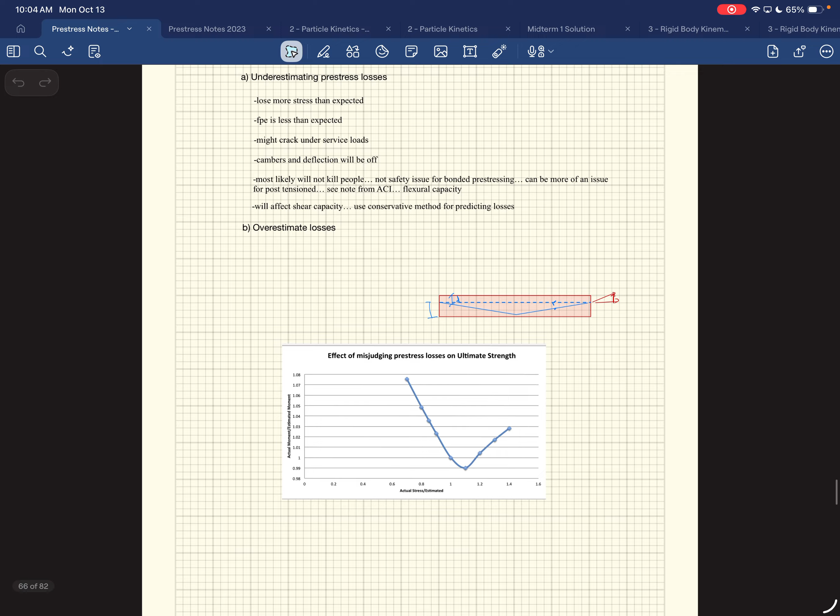All right, so we got... I gotta get organized here. Popped up on the TV right when you were tackling. I was like, that's...

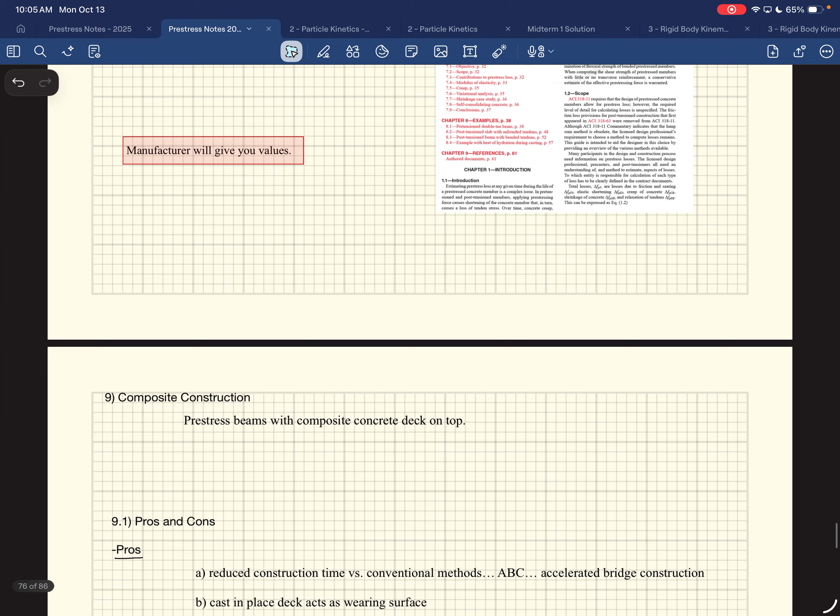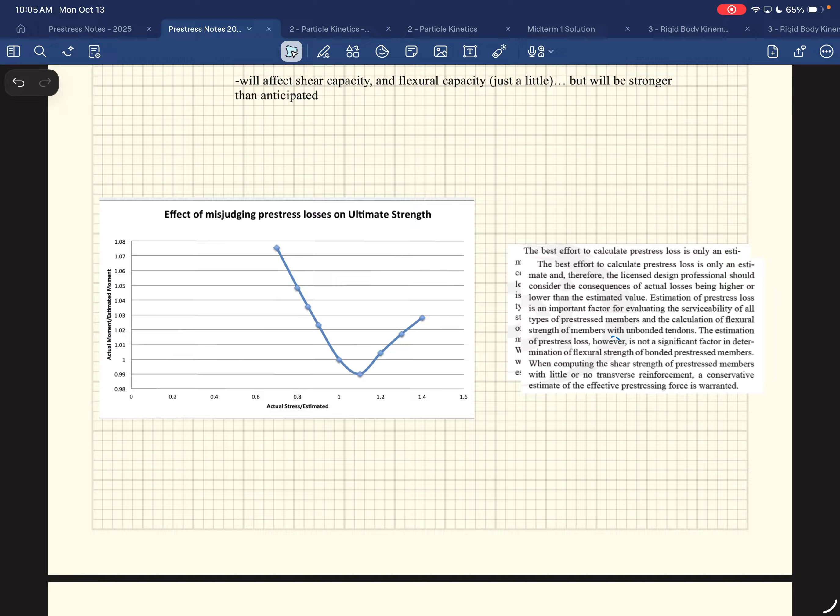Not to sit in there looking pretty. He does look pretty when he's sitting there, though. He does, but he shaved his beard off, or his mustache. Yeah, what's up with that? Change it up, keep you guessing. Yeah, gotta keep you guessing.

All right, so we're talking about Apprio. First of all, it went okay, I heard from some of you that it went good with Adam. I think that we've learned that maybe they're not... you just spilled coffee on yourself. No?

I heard that they might not be a PCI producer member, but I think we're gonna apply this week, hopefully, and just make sure that they can actually do it, even though they're not a PCI member or whatever, so that we could really take off on your exams. Did he talk about a time frame or anything like that? Like when we need to get him designs and when are we looking? The long story short is, basically, if we're doing mix design, if we do our own mix designs by about...

Monday, next Wednesday maybe. Okay, and then they're gonna cast those cylinders, and then like 28 days later have the beam designs. Okay. Before... yeah, I mean, do you guys want to do your own mix designs or just use their mix designs? The rules are a little weird because it says you have to have like 1 to 2 pages explaining your mix design. Does that mean we can use theirs?

Absolutely, and then we'll just explain what they did. That may be the easiest thing, is just use what they're used to using and then crank it out, because we don't know what our slumps would be. If you guys remember in Structures 2, what a pain that was — you estimate what the slump is, but what you actually get is different, and then what all the strengths are and stuff.

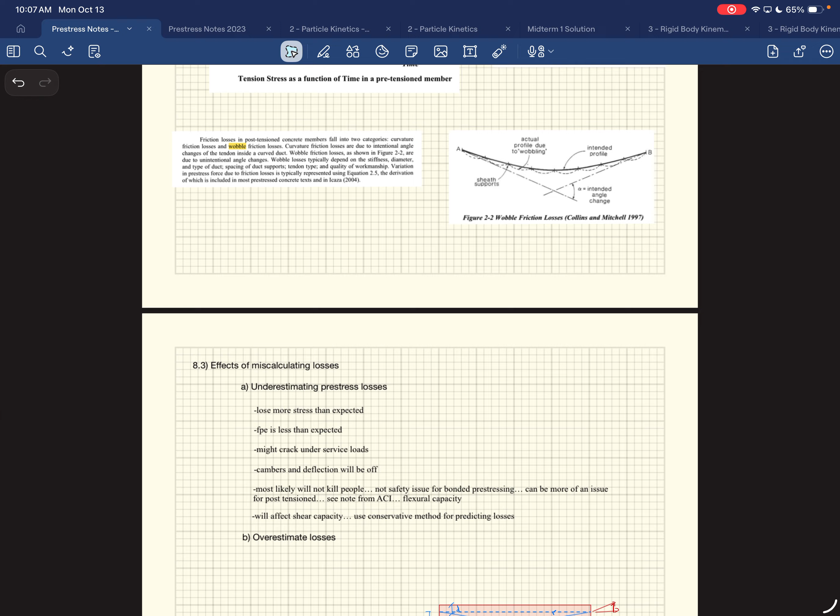I do want to show this — I stay at this lookout, and I'm actually gonna stay at it tonight too. This is the Garnet Mountain Lookout. It's open tomorrow night if anybody wants to use it. I know you guys have class at 8 in the morning, but I'm sure if you told Tim... I'm going up to it tonight with a couple friends. I'm sure if you told Tim what you were doing, he would say he'd record lecture, but he actually wouldn't record lecture.

But look at some of these shots that we got, it's really cool. I rent it every fall, and we go there. Also, this deal...

Oh, Jesus, damn right, I was watching it. Whoa, that's a hell of a deal right there. So what's that again? The sound. Look at that, Neil, huh? Look at it, he's all pumped up.

How was your elbow? Good. A little replay of it, dude. Boom, that's a fucking form tackle, man. That's a good hit, isn't it? Yeah, that's the kind of tackle that makes me angry, that's a really good hit. We'll just watch that over and over.

Film — how did film go? Film was good, right? Right? Oh, you haven't had it yet. Yeah, right, they're gonna be talking about that one. He's pumped. Boom, dude, fuck, you see his head shake and shit, dude? That's a good deal, good job.

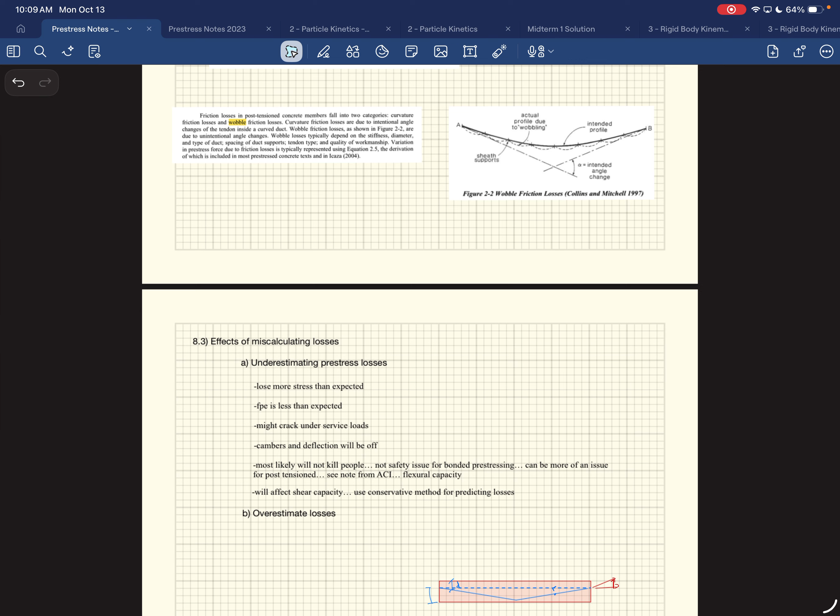Sitting there, looking pretty. I think they meant to call it on 18, but they called it on 19, because when you did that tackle, they're like, 'Oh good, welcome back, Neil.' Did you see this clip before? A little bit here and there. It says 'Welcome back, Neil,' or Daly, and then, 'You know, he did have that holding penalty early on.' Not even the same skin color. You got blamed for it, Neil.

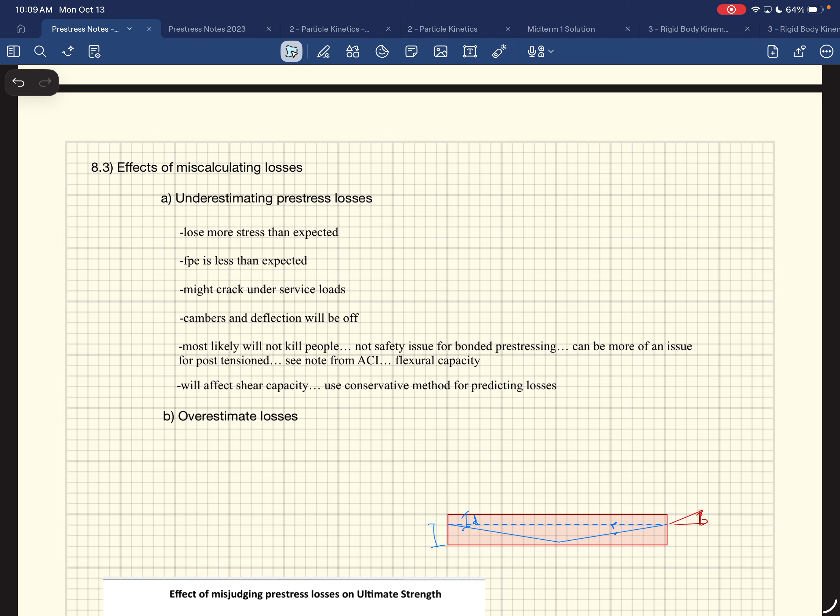Okay, so then what's coming up? We have one topic left, right? We have one topic left, and the topic is... so, is anybody interested in the lookout?

But because it snowed up there, I think Bryce used it on Saturday night, and he went up there in the rain, and then it snowed like 6 inches overnight, and he came back down. But you gotta take some time off, Neil, go up there, practice off. Think about it, because it's really cool. It's rented out every night of the year. I booked it 6 months ago, right on the 6 months to the date, right at the time it opened, and got it for like 5 nights or something like that.

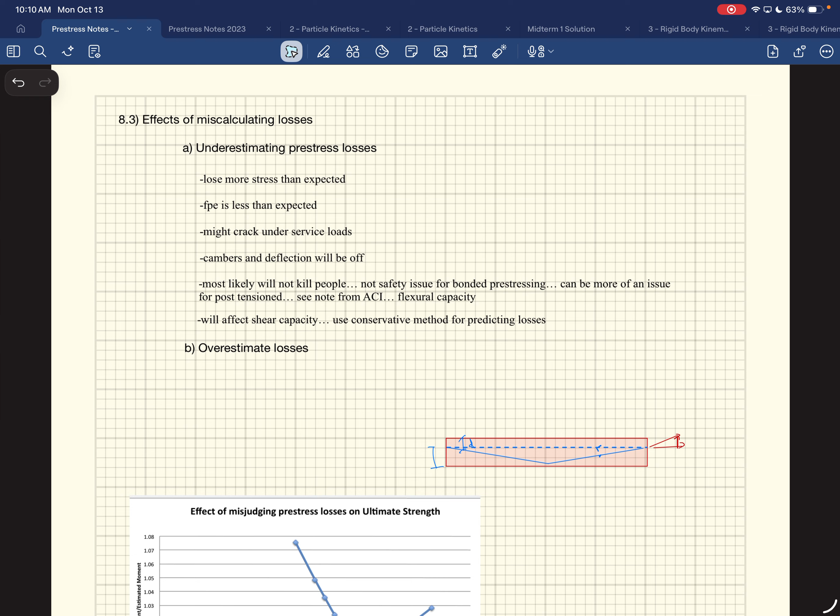So that's all, you're thinking about it. Thinking about it, but also Tim's not going to record the lecture. No, but I'm sure he wouldn't count it against you, but then you'd be up, and he loves catching people. He went through 3 names this morning trying to get someone, he just kept going, didn't get anybody. It didn't work, even though only half the class was there, he picked 3 names that were all there. He's mad, he's probably mad that happened. Right? I bet he'd understand.

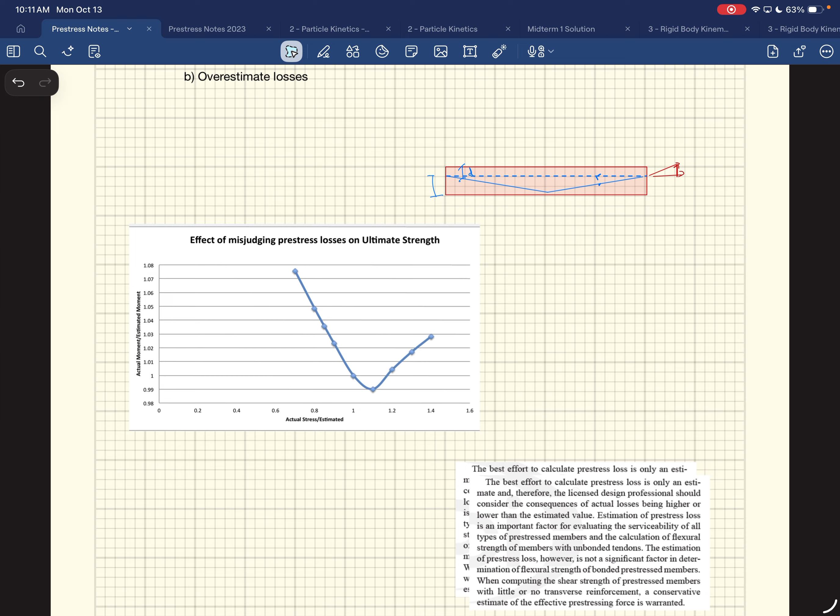It's cool, and then so you have to hike in. It's about 4 miles in with 3,000 feet of vertical. It's the lookout that's like if you're driving up to Big Sky, right by Storm Castle, right across from Storm Castle. You look up there and there's a little lookout tower sitting right there. Think about it, it's hard to get in there.

Okay, so we're talking about pre-stress losses. We have pre-stress losses that we're going to finish up today, and it's a pretty prescriptive method for calculating pre-stress losses. Then we're going to do composite construction, which actually works out really well for those of you in eGen 415. Who's in eGen 415? Because it's going to be a method of composite sections, or a method of transformed sections.

Kristen said she convinced you to teach it this way. That's bullshit. No, that's bullshit, did she say that? I've been teaching it this way forever, and she used to teach it a different way. I told her she should keep teaching it that other way because it makes me look like a better teacher, since she teaches it a very convoluted way versus the way that we do it. It's gonna be straightforward, and that's it. So we're gonna cover that, and that's it for pre-stressed, precast type concrete stuff, for the notes.

So we should be done with that the rest of this week. Next week, Monday, Kyle is going to start talking—not this Kyle, a different Kyle. He's going to do it remotely and lecture to us on post-tension floor design. He gets the floor for 2 weeks, so for 6 lectures he's going to talk to you about post-tension floor design.

We'll probably have one more homework associated with that. We have one more homework that I'm going to assign today, and then one on post-tension floor design, and then we're going to do an exam. That'll be sometime around Halloween-ish, and it'll be on pre-stressed and post-tension floor design.

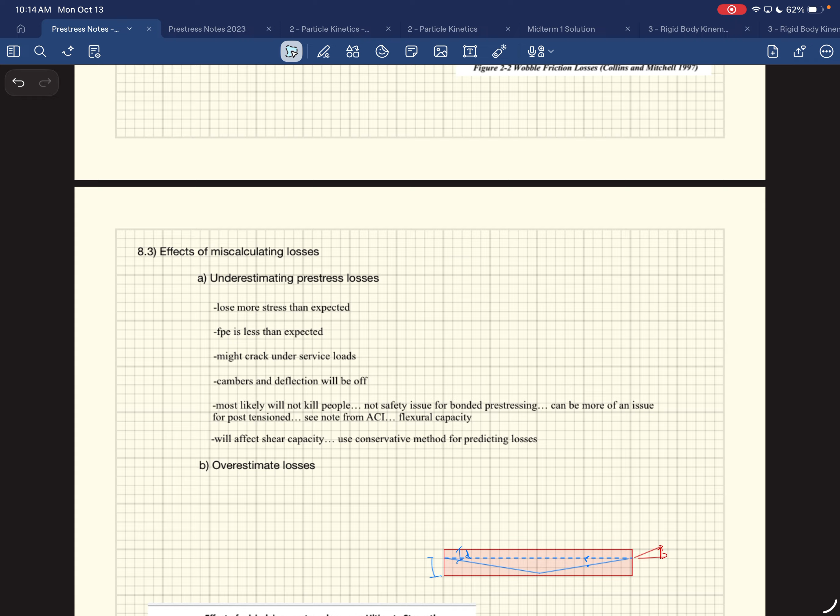I think last week. Don't hurt his elbow, dude. Fire over here. Yeah, I got you. I got you, Neil. Okay.

So that's where we're headed. So, anyways, it's crazy to me that we're this far into the semester.

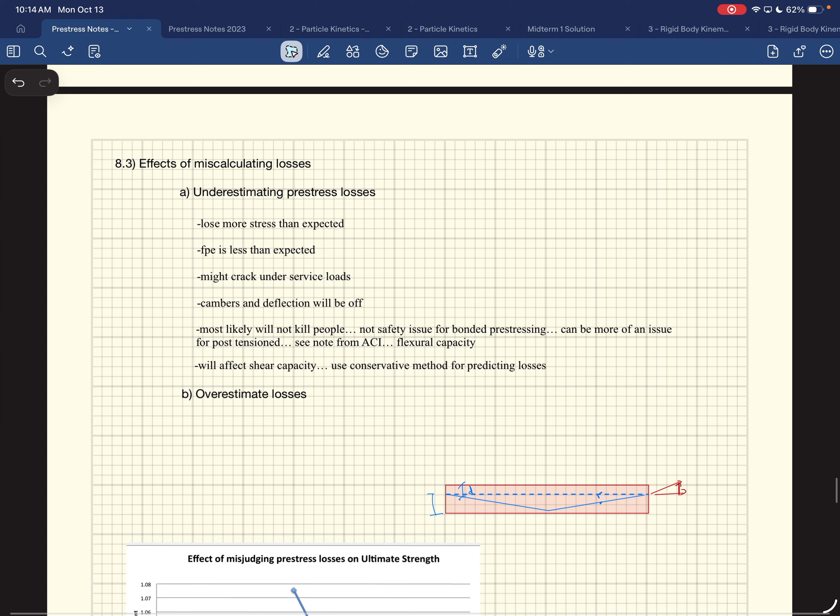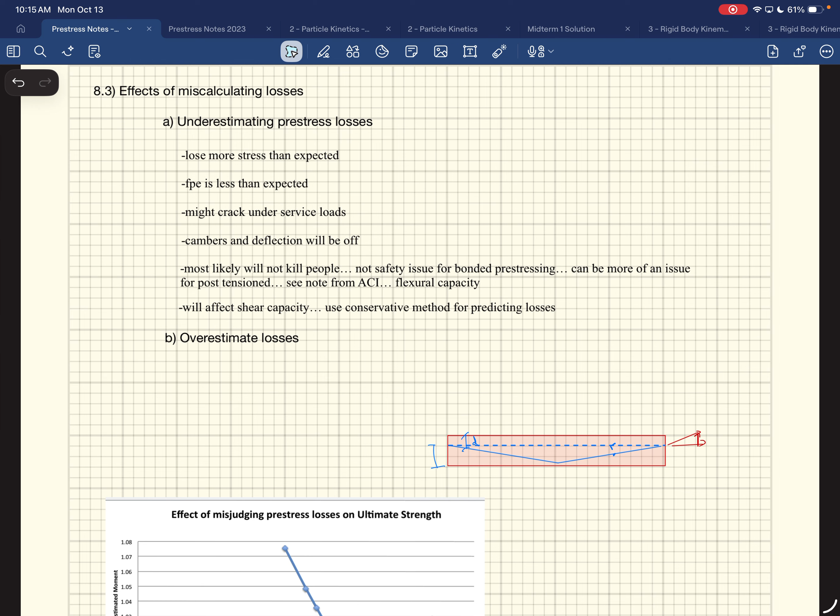So this is just to say, we were just talking about pre-stress losses, right? The biggest issue with pre-stress losses is serviceability. If you underestimate pre-stress losses, you lose more stress than expected. FPE is less than expected. It might crack under service loads, and your cambers will be off. But it most likely will not kill people—it's not really a safety issue. It will affect your shear capacity, because there are pre-stressing terms in your shear calculation, so it will affect that, but it won't affect your flexural capacity too much.

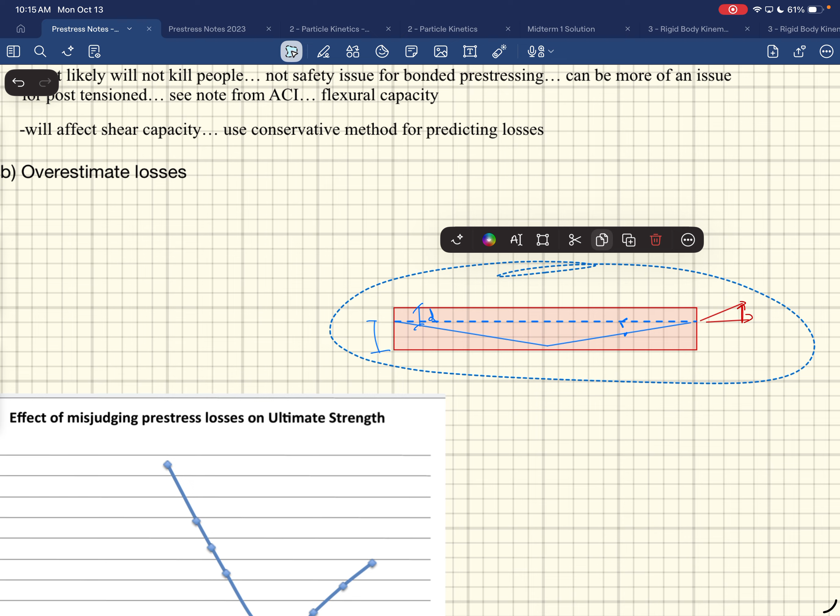If you overestimate the losses, that's what we're going to talk about next—this is for your homework, you don't need that here. So let's talk about what happens if you overestimate losses.

We lose less than expected. FPE is bigger than anticipated. You might think that's not that big of a deal, but if your pre-stressing force is bigger than anticipated, it's going to mess with deflections and cambers. You're not going to get premature cracking with this, but your deflections may be affected significantly. Shear will be affected, but flexural not so much.

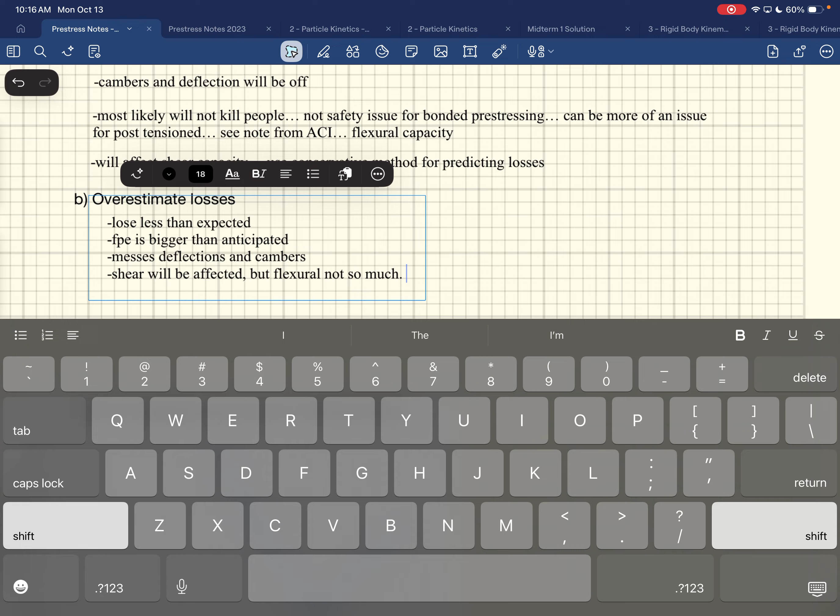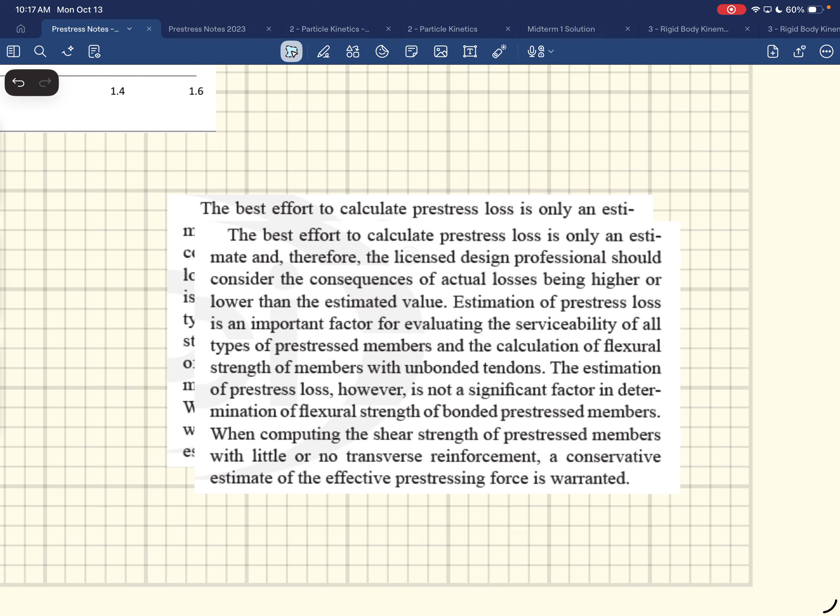I don't know if you have this note or not—I don't think you do. This came straight from ACI. It says the best effort to calculate pre-stress losses is only an estimate, and therefore the licensed design professional should consider the consequences of actual losses being higher or lower than the estimated value. Estimation of pre-stress losses is an important factor for evaluating serviceability of all types of pre-stressed members and calculation of flexural strength of members with unbonded tendons. However, it's not a significant factor in determining flexural strength of bonded pre-stressed members—so bonded pre-stressed members, it's not going to affect it that much. When computing shear strength of pre-stressed members with little or no transverse reinforcement, a conservative estimate of the effective pre-stress force is warranted. So ACI tells you it is important.

This shows what happens if you underestimate losses in one direction or overestimate them in the other. Even if I underestimate my losses by 0.75, my flexural strength is only off by 7%. If I overestimate or underestimate losses by even 40%, my flexural capacity is only affected by 2%. So it doesn't really affect it that much.

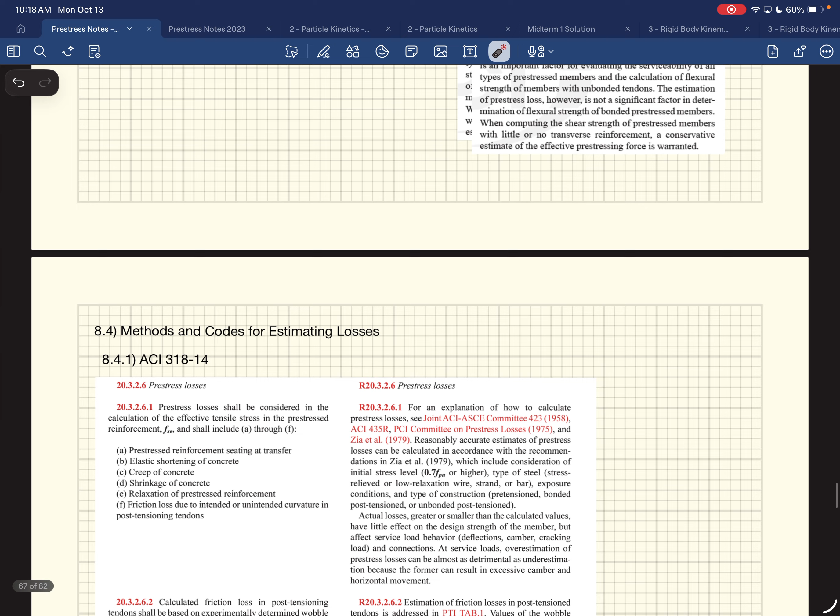So how do we predict these capacities? Let's look at what ACI says. This is ACI 318-14; I checked 19, it hasn't changed. Pre-stress losses shall be considered in the calculation of effective tensile stress in the pre-stress reinforcement FSE, and shall include A through F.

Pre-stress reinforcement seating at transfer losses, elastic shortening, creep of concrete, shrinkage of concrete, relaxation of reinforcement, and friction losses due to intended and unintended curvature. The unintended curvature would be your wobble stresses that we talked about.

That's it, ACI says you should do it. You should come up with a method that accounts for these things, but it doesn't tell you what that method is. It's the same deal: it's important, you need to do it, go do it, and then they give you some references.

We're going to use the method out of PCI, and what PCI uses is this Zia et al., 1979 method for predicting losses. Very current! But it's similar - like I said, they just point you in the direction you need to go.

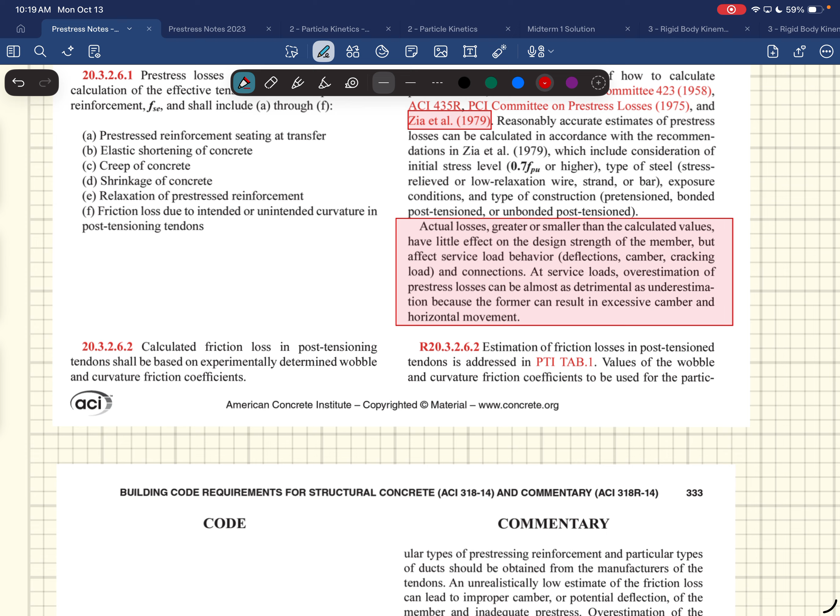There's another comment here: actual losses greater or smaller than the calculated values have little effect on the design strength of the member, but affect the service load behavior, deflection, and camber. At service loads, overestimation of pre-stress losses can be almost as detrimental as underestimating the losses, because you can get excessive camber and horizontal movement. So it tells you to be very careful about it.

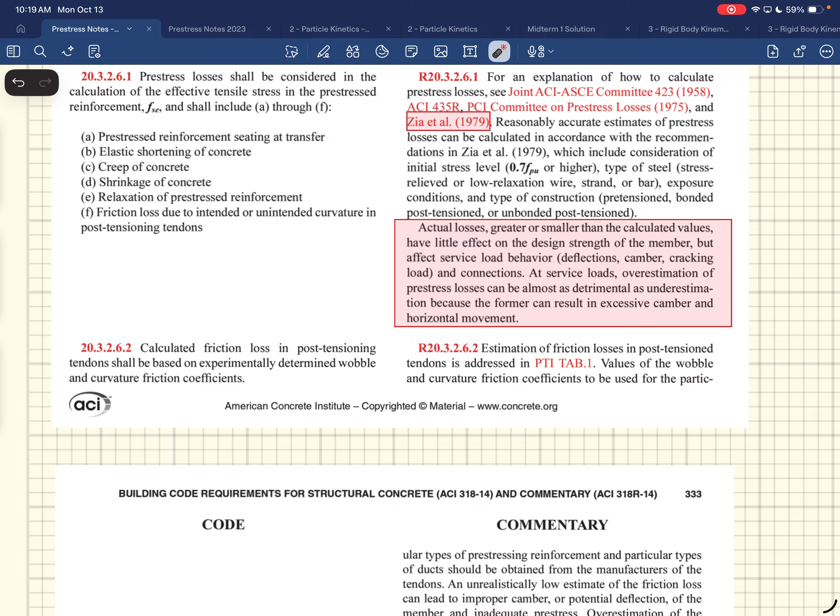But they don't actually give us a reference or a method here - we're going to use this PCI method below. They have a little bit more in the commentary that they talk about.

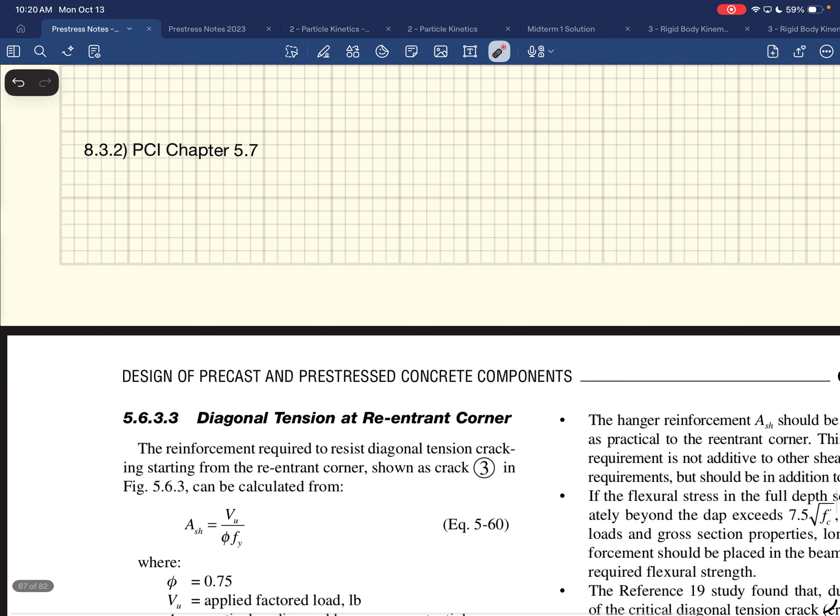So then there's PCI chapter 5.7 in the PCI design manual, on loss of pre-stressing. It talks through a narrative - probably worth reading through this thing. Sources of pre-stress losses: elastic shortening, shrinkage of concrete, creep of concrete, and then how do we actually estimate those pre-stress losses.

Here's the equation - your next homework is going to do this, you're going to estimate pre-stress losses. My total losses is going to be ES, which is elastic shortening, plus CR, which is creep, plus SH, which is shrinkage, and RE, which is relaxation.

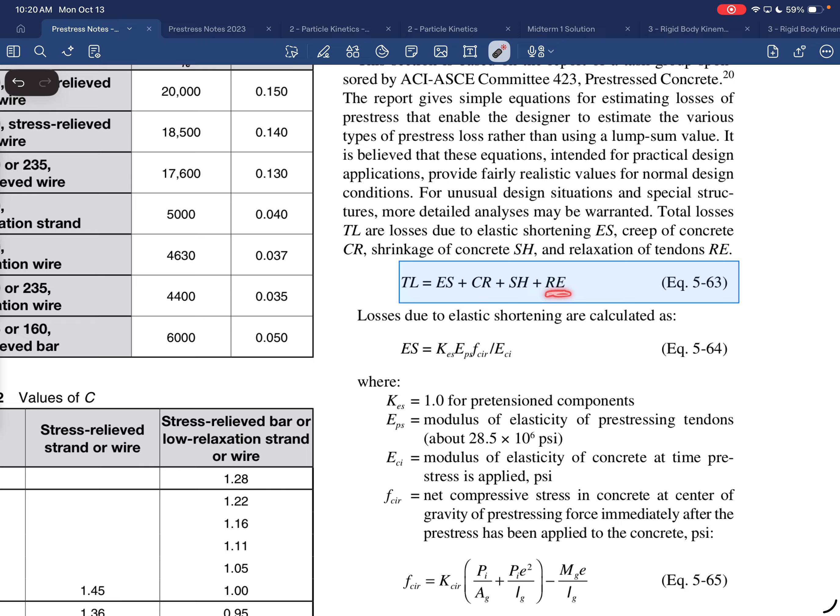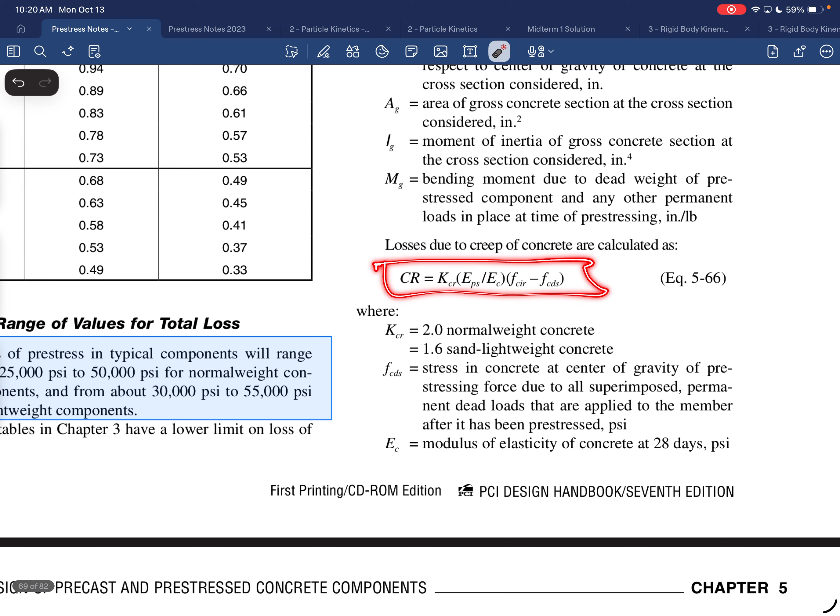It's very prescriptive. You go through and calculate, here's what ES is that we use, and they tell you all the variables. Then we calculate CR, used with this empirical equation, and it tells you all the components going forward. Then they keep going and tell you what RE is, and so forth.

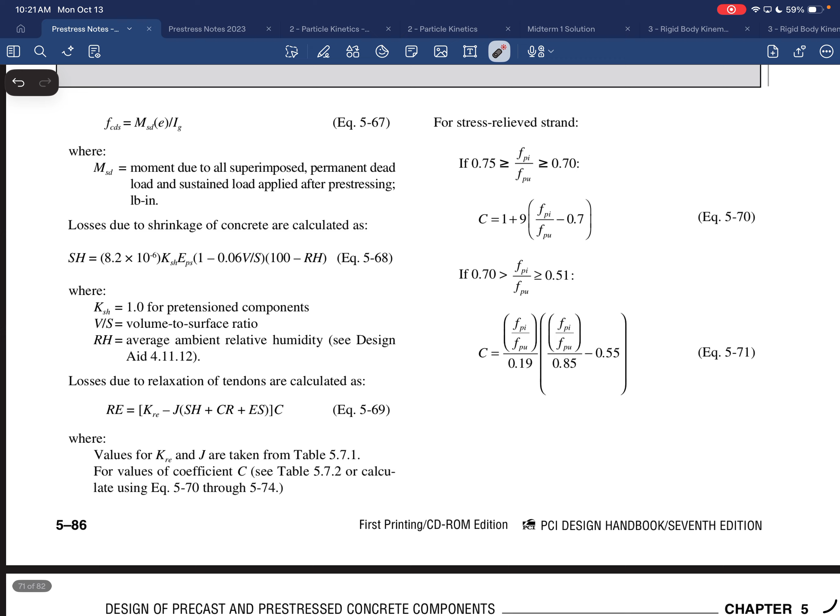So when you do that, you'll just go through and follow it step by step. I think it's all pretty self-explanatory, very prescriptive. And then they also provide an example - here's them applying it to a certain structure, and you can calculate the pre-stress losses.

One thing worth noting, we talked about this at the beginning of the semester: this is the range of pre-stress losses that we're going to get. The range of pre-stress losses is from 25,000 to 50,000 PSI.

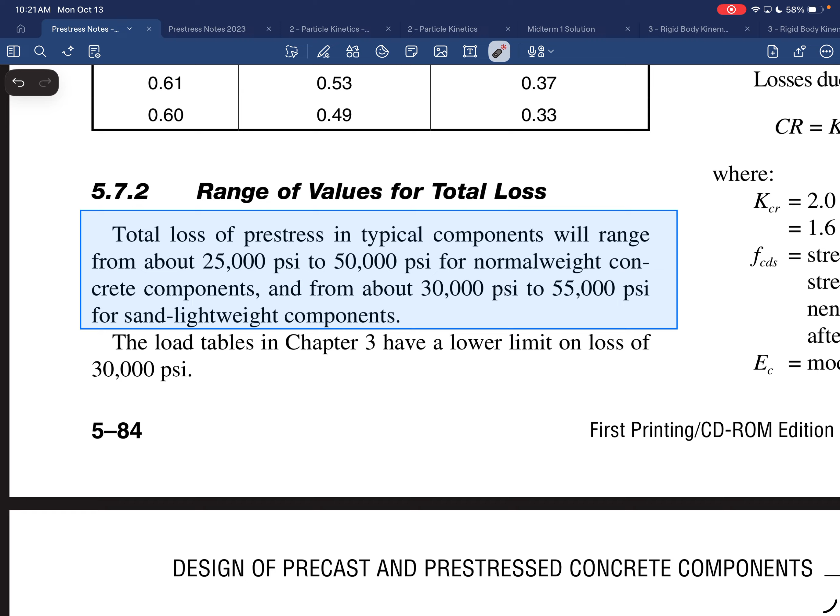So there's a lot of loss that happens, right? That's why we're using 270 KSI steel, so that when we lose 25 to 50 KSI in the pre-stress losses, we still have some effective pre-stressing forces. Otherwise, if you use conventional steel with a yield stress of 50 KSI, you could stress it all the way up to yield and then transfer it over, and then just have nothing left. There'd be nothing left after all the pre-stress losses.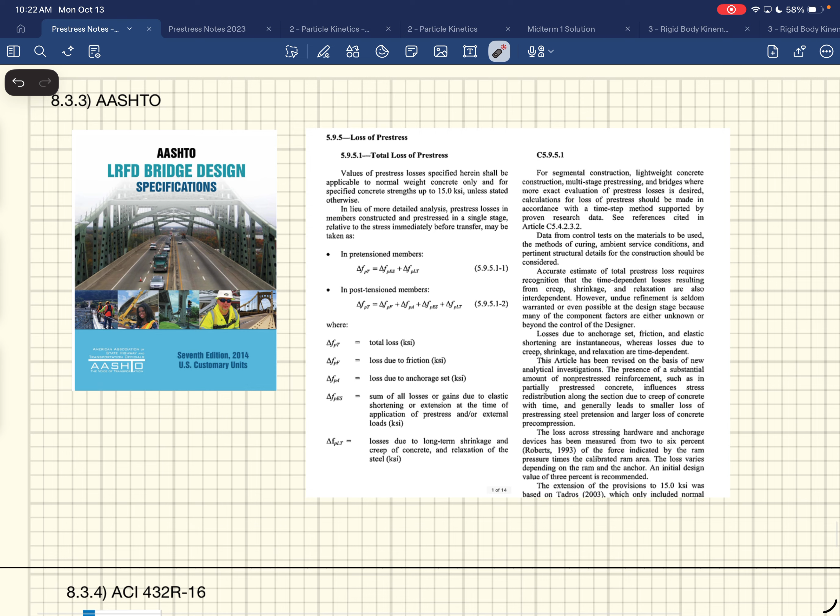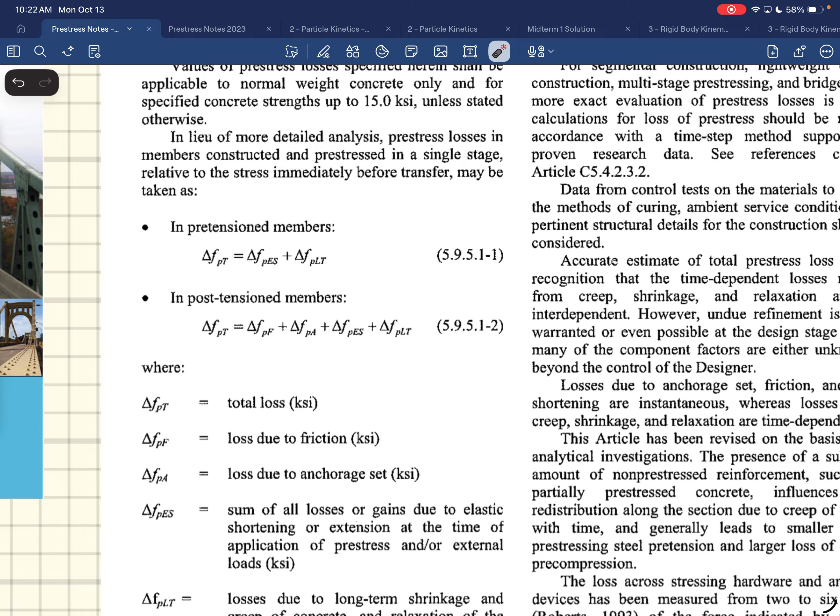Okay, so like I said, you'll do that. The other thing, AASHTO also has a method. We'll look at AASHTO a little bit when we talk about bridges, but they have a method, and theirs is very prescriptive. They do say it's important. It's structured very similar to the PCI, where the total pre-stress losses is elastic shortening plus the long-term pre-stress losses, and they give you an equation for it. It's a very procedural and prescriptive method for calculating pre-stress losses. If you go into bridge design, you'll calculate it this way.

Also, ACI 432R-16. This is committee 432. They have a full committee on estimating pre-stress losses, a full document. So there's a document, ACI 432, and it has methods for predicting those. It basically uses the references in ACI 318. ACI 318 says, here's some references. This does a little more deep diving into those references and then gives you that. So if you end up calculating pre-stress losses, you could use this method as well.

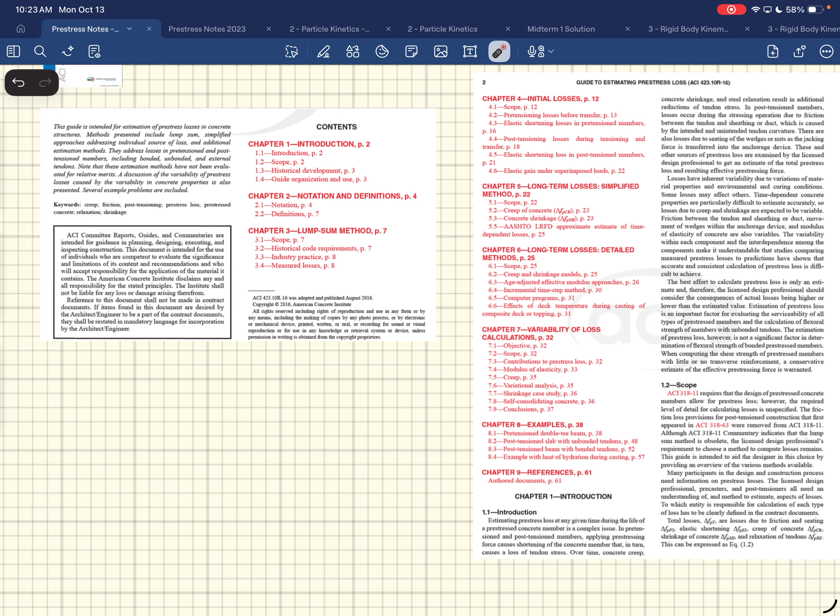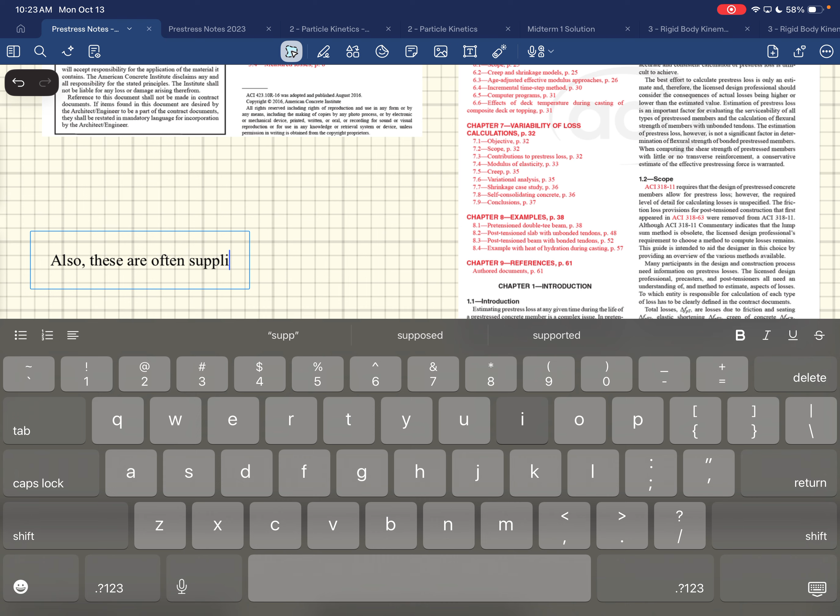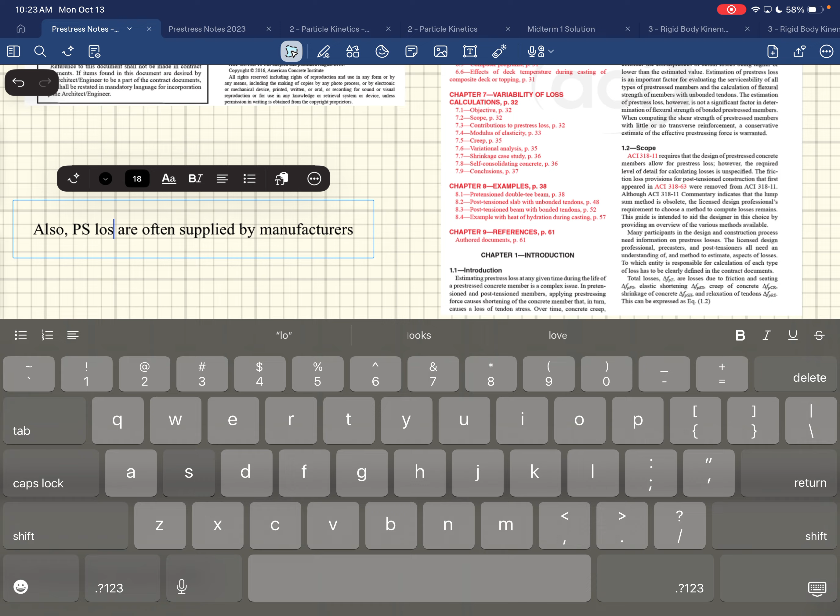The other thing, I don't have it in the notes, but these are often supplied by manufacturers. I guess this is maybe more clear: pre-stress losses are provided by manufacturers. Those plants know how much pre-stress losses they're going to get, and they'll tell you.

Did you guys discuss that at all with Adam? Maybe not, because they should have an estimate on what those pre-stress losses are. I think maybe you guys may need to calculate them as part of your designs, but then also they know. So it might be worth following up with them later and asking what typical pre-stress losses they get, or what equations they use. Because they've been making their members for a long time, and they know what kind of pre-stress losses they get.

When we talk with Kyle next week, he'll explain to us how, when you do post-tension floor design, you as a designer give the fabricator the effective pre-stressing forces that you need for your designs and what it is that you put into your equations. Then on the other end, they go through and estimate how many tendons they need, what they need to stress them to, and what their losses are going to be, so that when they deliver the product and post-tension in place, you're getting the effective pre-stressing forces that we as engineers told them they needed.

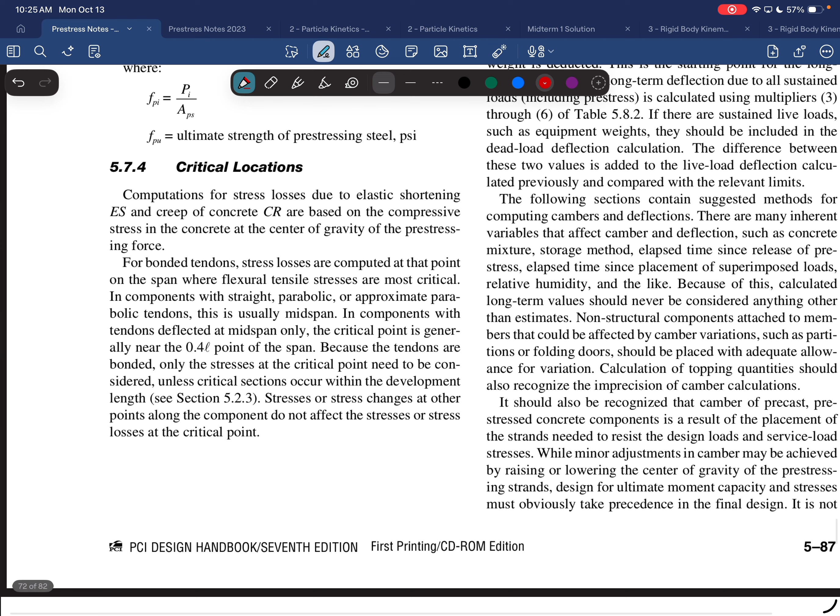So that's how they end up doing post tension. You just say, this is what I need for my design, this is what I use in my calculations, and it's up to them to estimate the losses and the pre-stressing, what stresses they go to, and how many strands they use. They do all that, and he'll explain that more later. But that's just something to know. Not to mention, when you order up one of these pre-stressed beams, they're kind of pre-engineered—the people at the plant actually do the estimations and design them, and then we just check their designs to make sure they're doing it the way they're supposed to for these pre-stressed members.

Did Adam say anything about whether they have an engineer on staff? Yeah, they do. Was he here? Yeah. Did they come here just for us? Did they drive from Missoula just for us, or were they in the region for something? I don't think so, because they also brought one of their architects down. So I wonder if they're here for something else. The architect is out of Spokane.

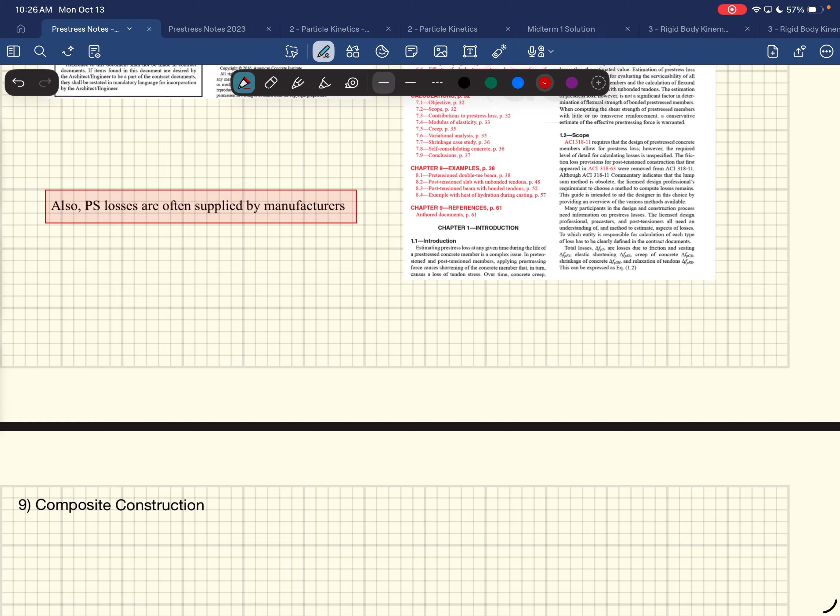They're excited. Neil, did you tell him you're on the football team? No. What the heck, man? I would have told him. I would have told him. Were they Grizz fans? No, they're all Cat fans. Yeah, thank God. All right, Neil would have had to kick their asses. Get out of here.

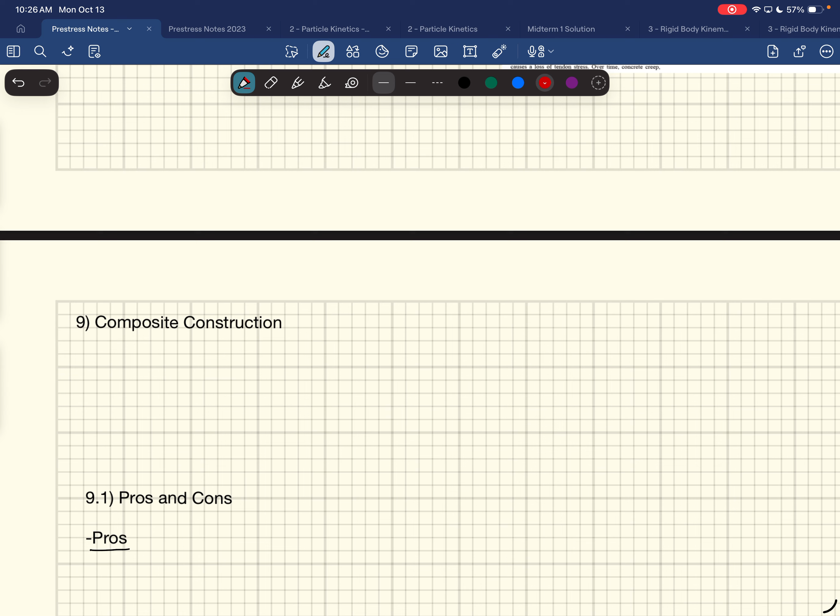Okay, that's it for pre-stress losses. So there's all these different methods, but we're just going to use the PCI method.

For the homework, I'll basically grab one of the sections out of the PCI design manual and say verify that it can carry this load. That means you check to make sure it works for service conditions: tension at the bottom or tension at the top, compression on the bottom under initial conditions, and vice versa under service conditions. Make sure it can carry the ultimate moments, make sure it can carry the ultimate shears, and then estimate the pre-stress losses and estimate cambers.

Then you can compare your estimate of camber versus what's in the table, since they have estimates of camber there. It sounds like you guys have a program that does the elastic analysis, right? Something that proves whether your allowable stresses are above or below the limits, and gives you the ultimate moment capacity. You have a spreadsheet or code that does that, and the same thing for shear capacities.

You can see that it actually doesn't quite work. It's really close in some areas, but according to our calculations, it might fail in a couple of spots. They put some stuff in there saying it might fail in certain spots, so they add extra reinforcement in those areas. That's what you're going to do. It does take a while because you have to deal with those tables and figure out what all the variables are, but it shouldn't be too bad.

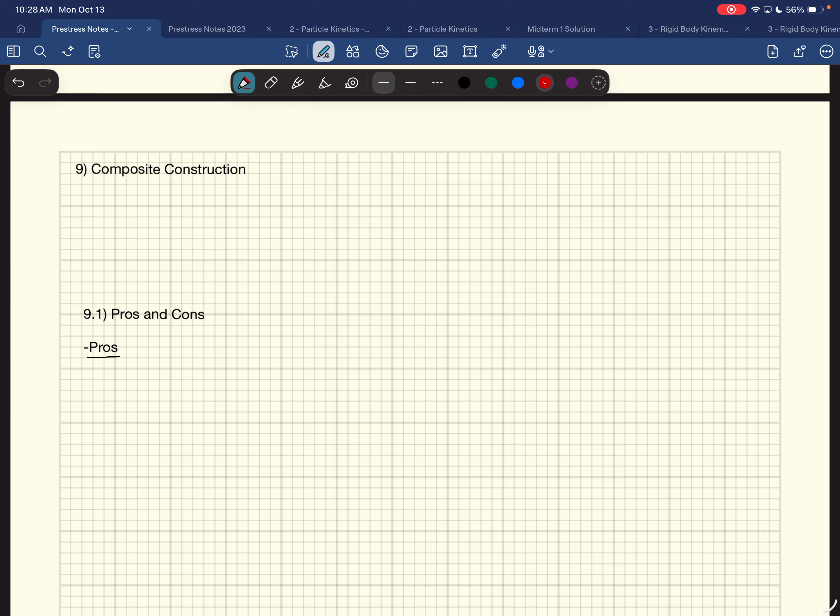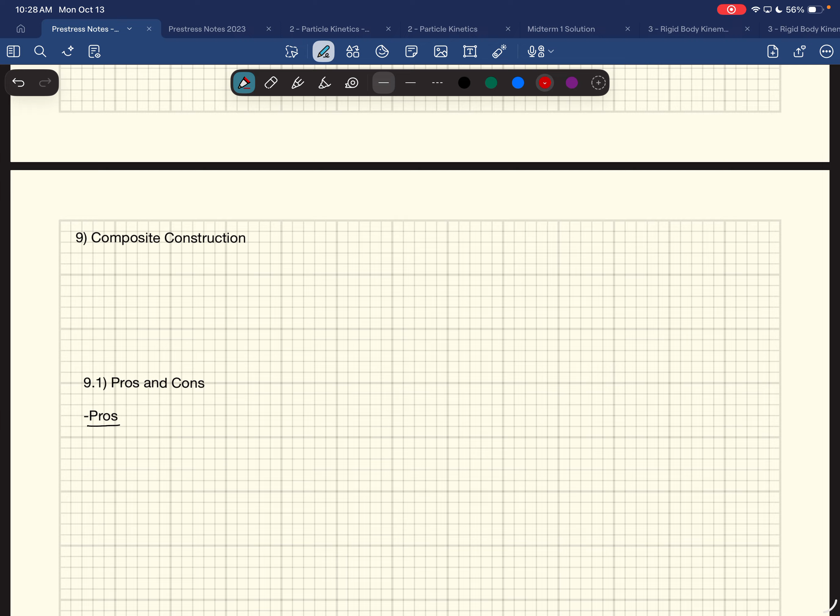Composite construction comes in all sorts of forms. Reinforced concrete in general is composite construction—you've got two different materials combined together, steel and concrete. So just in that sense, that's composite construction. You've also heard of composites like plastics and fibers and stuff like that; those are also considered composites.

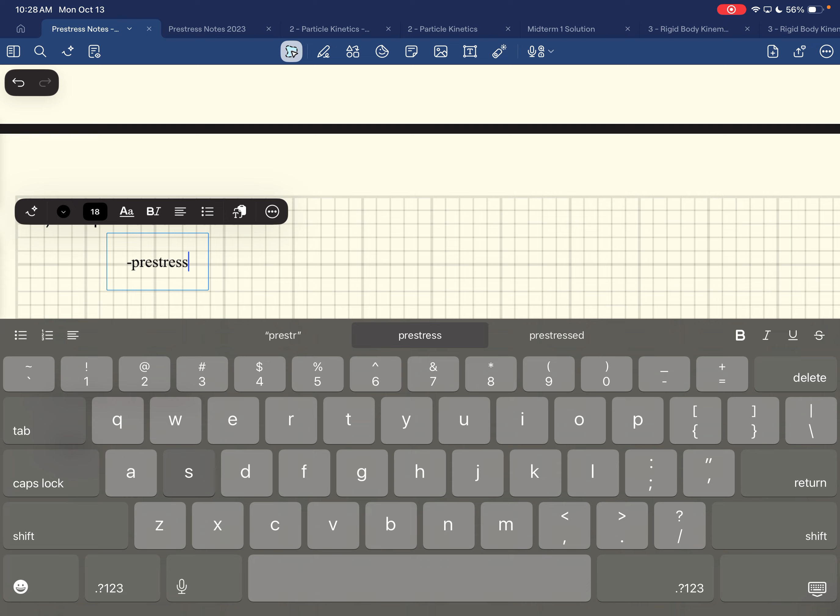In pre-stressed concrete, when they talk about composite construction, we're talking about pre-stressed beams with a composite concrete deck. So you come in, you put down your pre-stressed beams, and then you cast a deck on top of that. That deck will act compositely with the pre-stressed members.

This gets complicated because your pre-stressed beams are made of a higher strength concrete with a higher elastic modulus. So you might have a 10 KSI pre-stressed concrete beam, and then you put a 4 KSI concrete deck on top of it—two different materials. Also, the pre-stressed beam is already pre-stressed, so it's already in a stress state with pre-compression and all this stuff going on, but the deck doesn't have that. The deck is starting from scratch when it starts out.

So there's this: we have the same load stages, initial load stage and then service load stage. But on top of that, we also now have a deck that starts acting compositely afterward. What happens with the pre-stressed beam at the beginning stays the same—the initial pre-stressing and transfer don't include the deck at all. Then you put your beams down and cast the concrete on top, so the beams have to carry the concrete to begin with. Once it hardens, it's ready to be loaded.

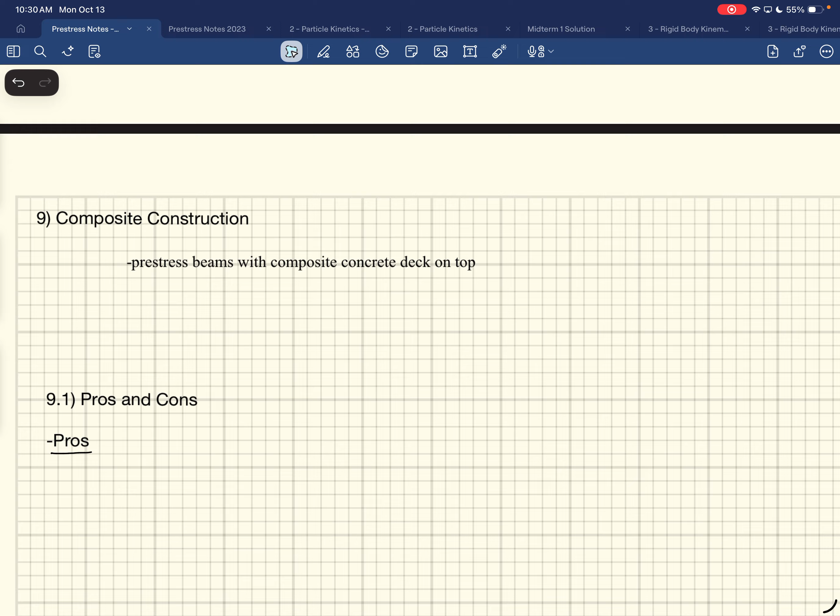And at that point, from there on, it's going to be acting compositely. So then when you apply the service loads on that, now the deck is getting included in the flexural response. And so then we have to, you'll see, we're going to get down to these...

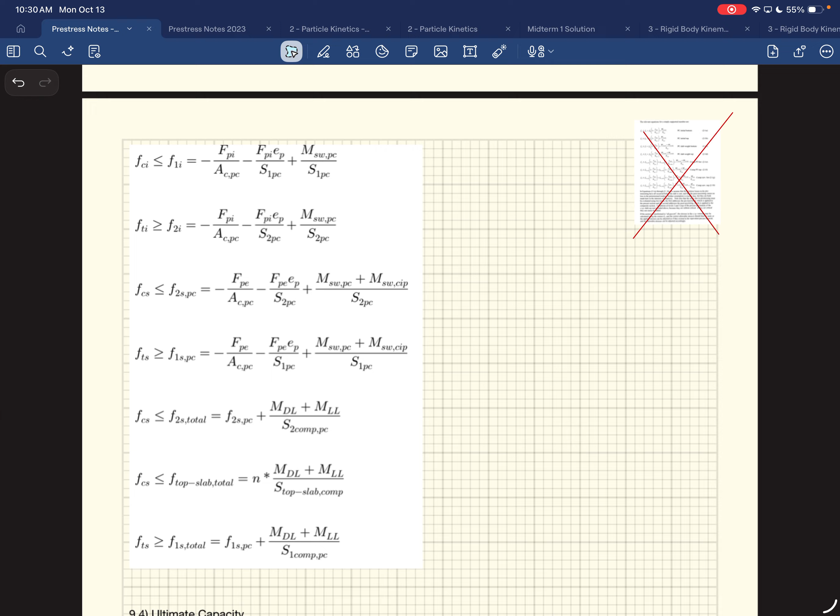Guys, right? Where sometimes you're going to be using the pre-stressed beam alone. Sometimes you're going to have the composite members, right?

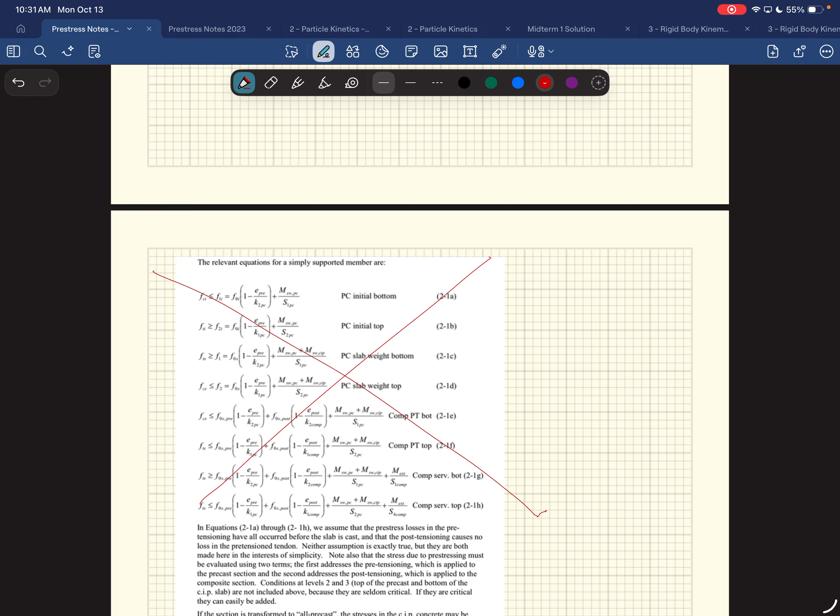Stanton has it in his notes, but his is garbage. The problem with his is he makes 1,000 mistakes in it. So we're not going to use that. There's all sorts of mistakes. And so then you're trying to learn it, but his is even more complicated because he's also using those kerns throughout and stuff, and it's just confusing. So we're going to have our own things.

But that's why this ends up being complicated, is because we have to do methods of transform sections partway through, but only certain parts have that, and other parts don't have it and stuff. So that's why it's going to take a couple days to go through it.

Okay. All right. Pros and cons of this type of construction. Pros. Reduced construction time.

Accelerated bridge construction. That's one of the things, right? When you don't have to cast a beam in place, you just have a pre-stressed member that you come in and plop into place and it's ready to go, and then you just form up the deck on top. Then you could speed up the process, right? And that's a big word and a big concept in bridge design, this idea of ABC. That's what they call it, accelerated bridge construction. How quickly can you get something in?

There's a big range of that. When we did a bridge outside of Wisdom a couple of years ago, when we used UHPC, that was accelerated bridge construction, 96 hours. They tore out the old bridge and then built a new bridge. And the way they did that was all with precast members. They had all these precast double T's that they just came in and put into place. They tore out the old one. They had a bunch of precast caps that they put into place, and then precast double T's that they put into place. And then we used our UHPC to glue it all together. So in a 96-hour window, they replaced the bridge and had traffic on it again. And then we did it again a couple weeks later. That's accelerated bridge construction.

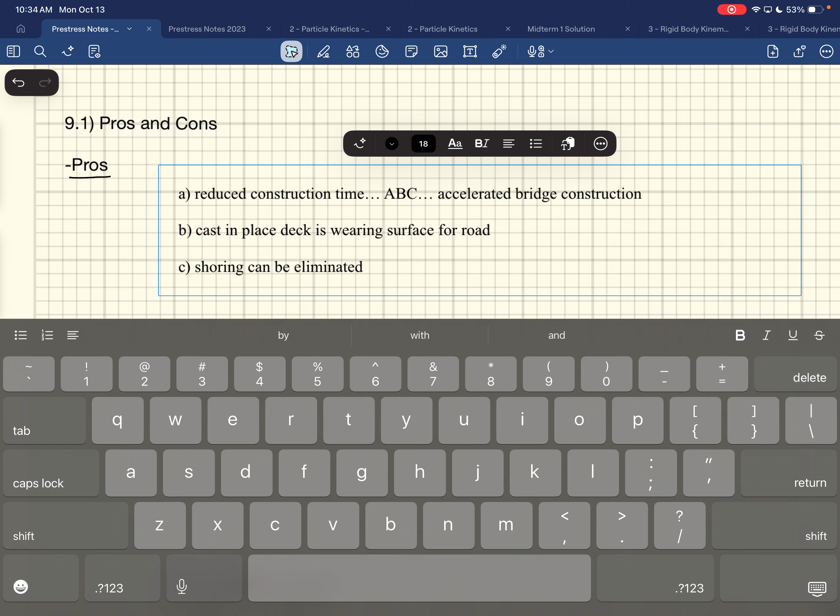Shoring can be eliminated. Right, so if you have a big pre-stressed member, shoring just means, do you support it in the middle while it's being built, and then you release the load and it transfers over. If you have big enough pre-stressed members, you don't have to do that. They can just span across. The benefit of that is if there's traffic underneath the bridge, you don't have to have shoring sticking down there, right?

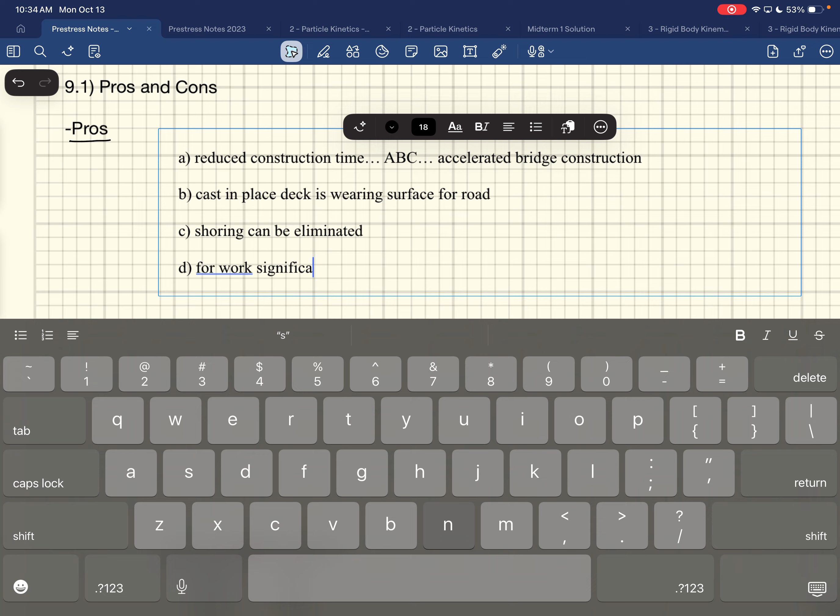Formwork, right, 'cause you don't have to have formwork for the beams and stuff. Lots of pros here.

Added slab provides continuity. It kind of ties everything together. Ties everything together.

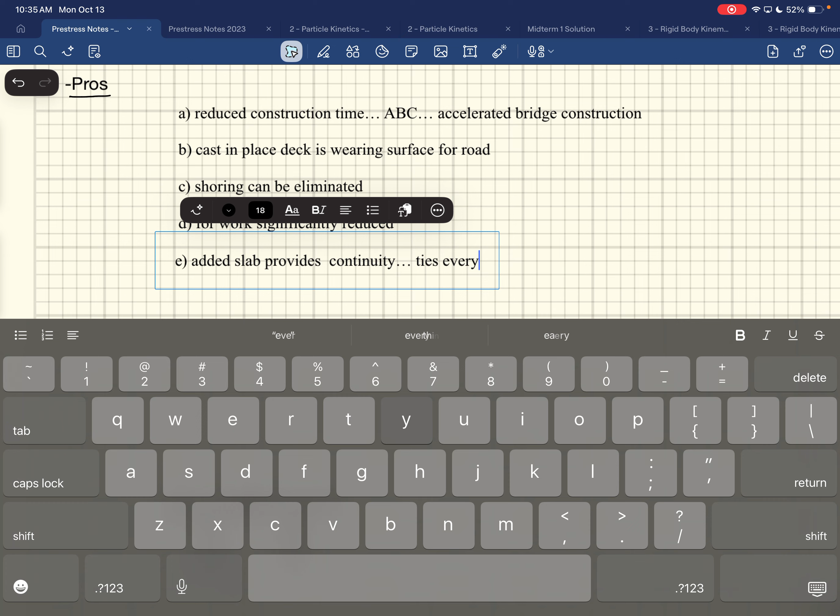Gavin, are you sick? Oh, it's cold weather. I guess it got fucking cold. It was cold this morning, wasn't it? The wind, like, yeah, just walking, the eastern wind just blasting you. It's terrible. Reminds me of Fairfield. Oh yeah, makes you feel like home, right? Sucks, right. The wind.

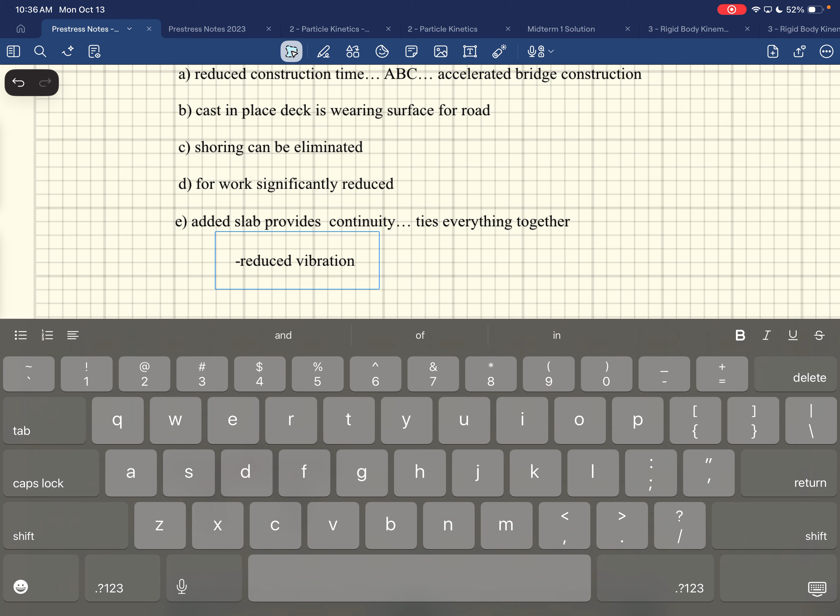My wife doesn't like when my kids say suck, so we call that the S word. Suck. Somebody says that sucks, they're like, Tyson said the S word. That's the big one.

Reduce vibrations, right? Because everything's kind of tight. This is the benefit of having everything tied together, reduced end rotation, which means smoother rides.

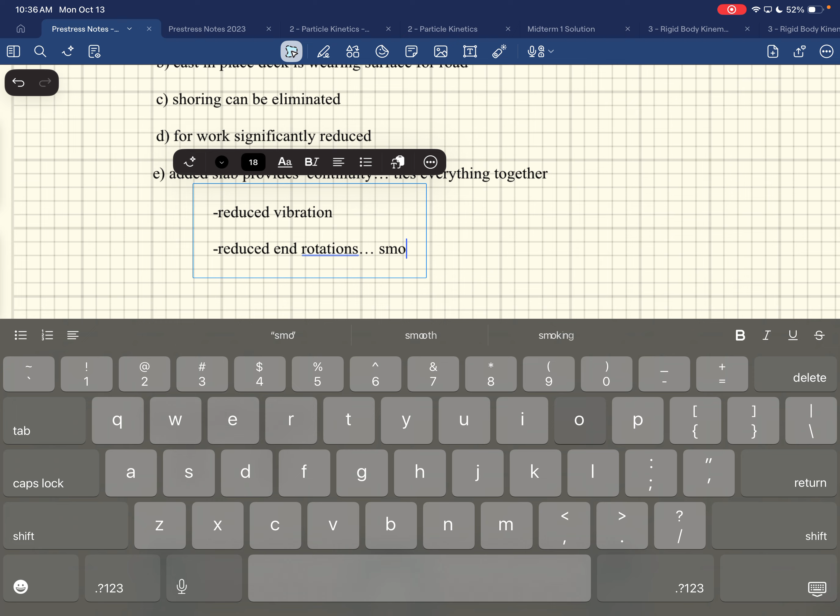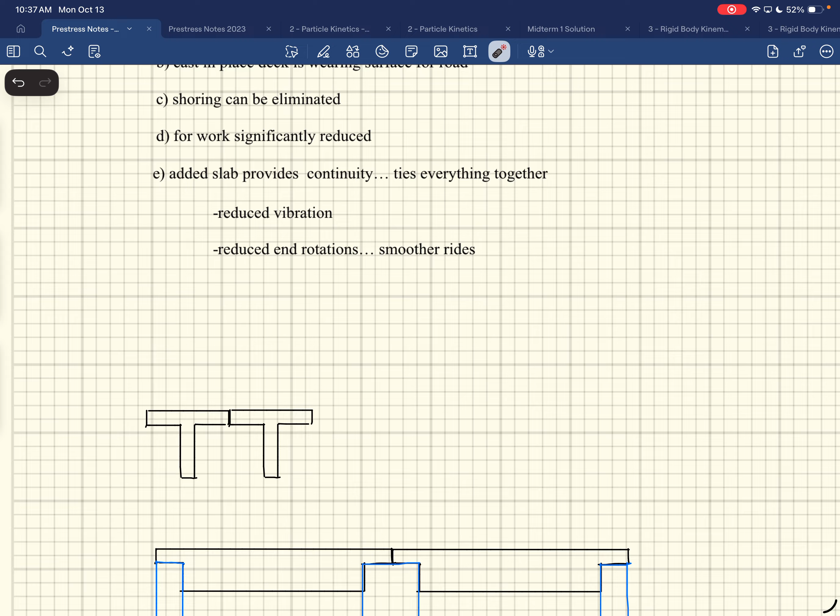Let's see if I got this. Right, it goes across the... oh, you motherfucker, I'm so mad. There we go, right, it just kind of ties it together. You put this slab on top of it, so instead of one carrying the load and the other, now you're going to share it between the two, and they're all kind of tied together.

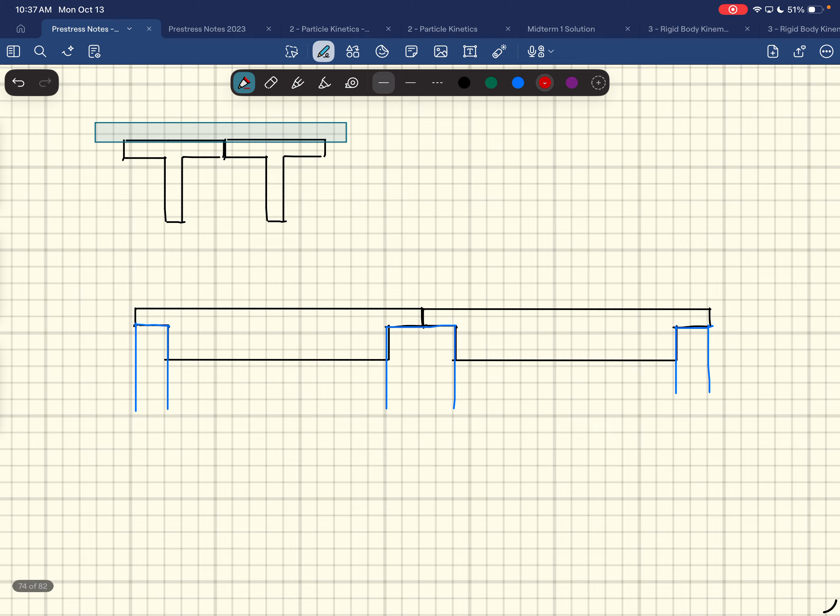This would be looking in the other direction, not the cross section, but just looking at the spans. Here's your car, I'm gonna draw my car here. That's pretty good, actually. Oh, motherfucker.

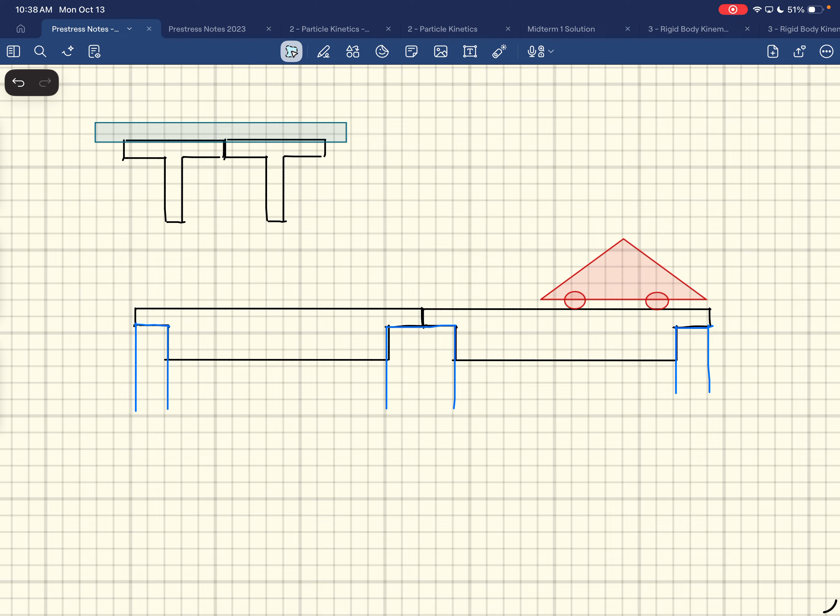A Cybertruck, that's a fucking Cybertruck. There we go, that's good, Luke. It's a Cybertruck, god damn it. I was trying so hard, I was really proud of myself. All right, so there's my Cybertruck driving along, right? And if I need to move it up, I gotta provide for that.

That's really funny, so we're gonna assume it doesn't fall apart before it crosses. That's right, it becomes a dead load when it breaks down. God damn. We're just testing heat resistance and all the components, which is fine. Really unfortunate because it's been like 12,000 pounds.

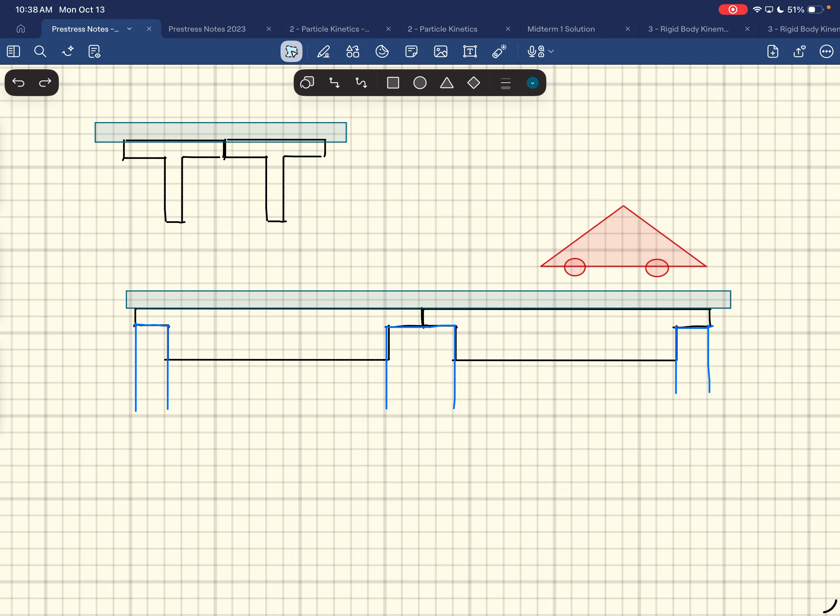Just drive along on there, right? You can see that by end rotations, this is what I'm talking about. End rotations right here. If this thing wasn't composite, this guy would bend down like this, so that if you're driving along, you'd get a bump in the middle there when you go across that. Versus if you tie them together, you're going to get reduced rotations and make that a smoother ride along the way. And you'd have negative moments going through there, so you'd have to put some rebar in here, tying that together, because you get tension across that. But that's what I mean by smoother rides, once you put this thing on top of it.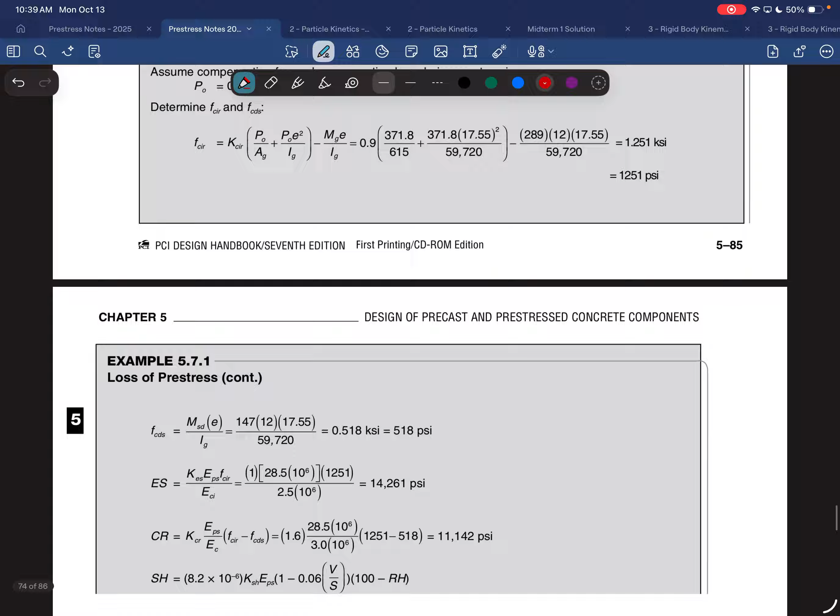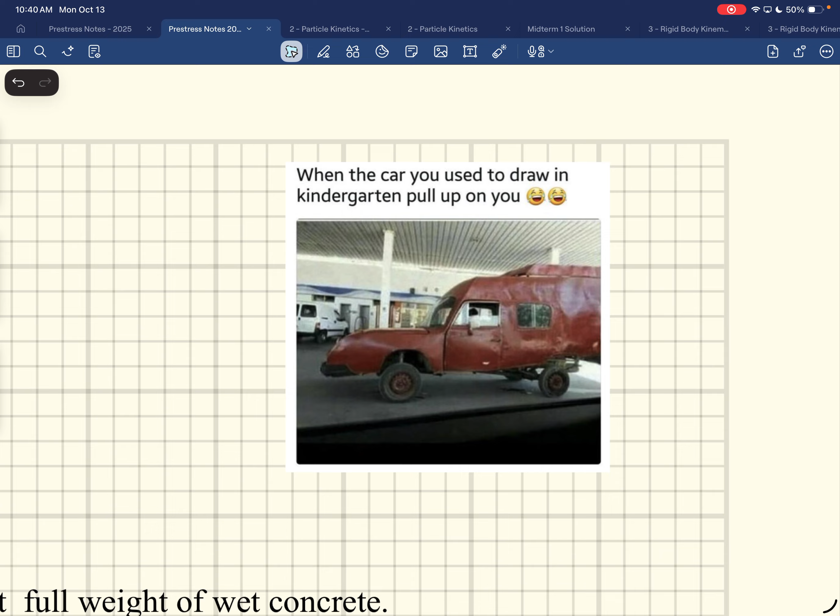All right, I don't know if you had this in here before. This is a joke I saw. Like when you try to draw, when I try to draw the car, you try to draw and it pulls out. So that's kind of what it looks like when I draw a car. And that's like a real car that looks just like that. I don't know if you can call that a real car.

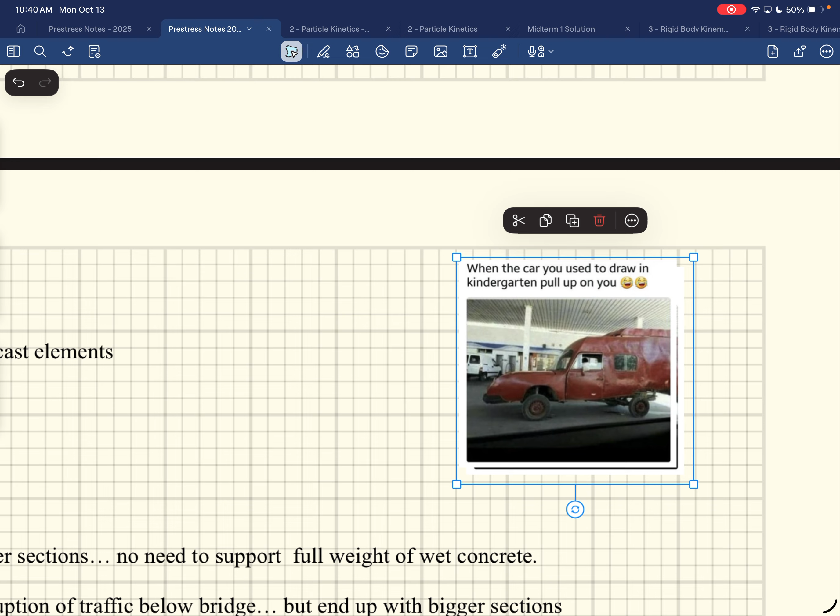Good point. Is that a tow camper attached to it? I'm not sure, I mean, it does look like that. It's what it looks like. There's like a trailer that they welded together with it, it looks like they welded a camper to a truck cab. Front end on it. Yeah, that's right, and then pieced it together. It was running, it was at a gas station.

Cons. What do you think a con would be? Cost, right? If you do it this way, it might cost a little bit more, placing concrete.

In general, right? And then another one is, this is just pre-stressed, like bridge elements in general - why these could be difficult.

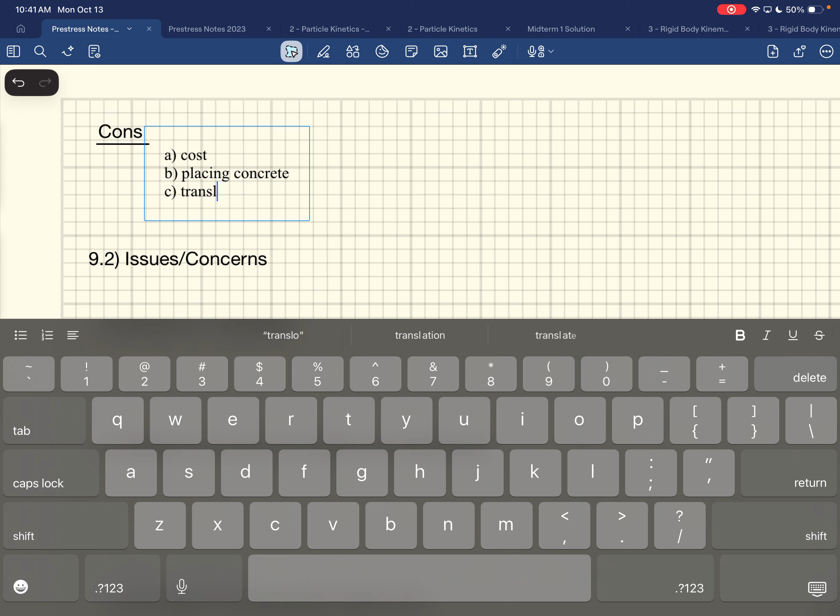Transportation - that's what I wanted to talk about - transportation of precast members.

You do see, like when you're driving down the interstate, you look up at all the overpasses you go by, and most of the bridges nowadays are pre-stressed concrete. There's some exceptions, like the bridge going over Rouse, where the interstate crosses - those are big steel girders. Steel girders let you get further spans, but we use pre-stressing a lot just because it's super durable.

It's concrete, right? Despite what Tim says, concrete doesn't rust and fall apart over time. It does really well, and so it gets used in bridge construction a lot - a lot more than trusses.

You don't see trusses really going in anymore - these big trusses. It's unfortunate because they look cool. I think they look cool, right? In the next couple years, I don't know if you guys ever got to Axtell Bridge - that's a big old truss bridge. They're going to replace that with girders.

Yeah, I know, but it makes sense, right? It's a one-lane bridge, this 100-year-old bridge, versus 2 lanes of traffic with a pre-stressed member that's going to last a couple hundred years. So unfortunately they're going to replace it with that. They're not as cool though.

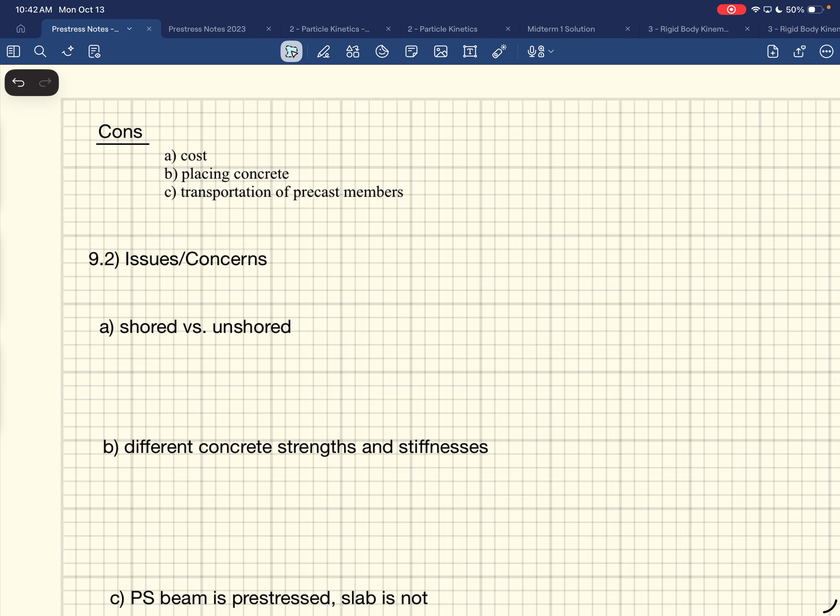Transportation of members - I only have a few YouTube clips to show you, but here's the transportation of a member on Mountain Road.

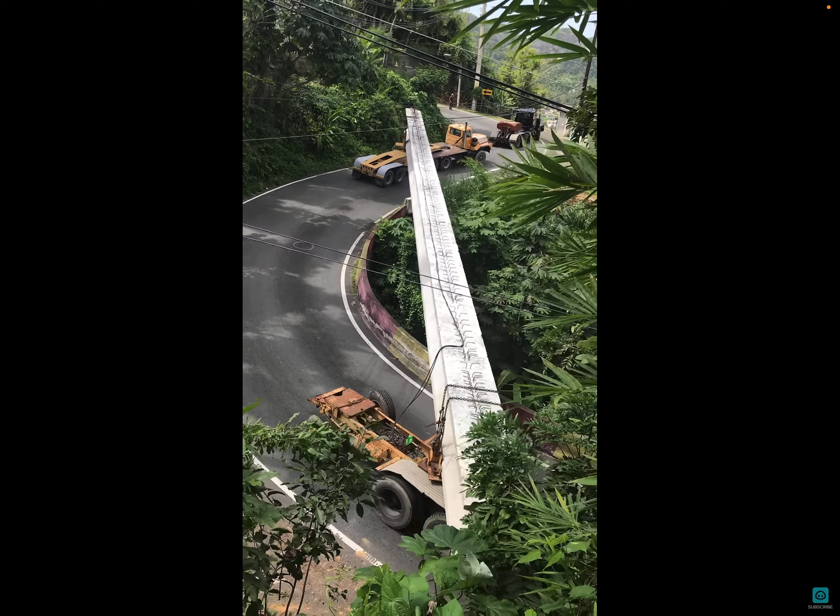Isn't that crazy? Tilt your head sideways real quick. Just steer the back end of it around. They have not watched Final Destination. Yeah, I thought the same thing, Sean. Tuck and roll - is he pushing?

By the way, look - note all the rebar that's sticking up from there. We're going to talk about that shortly. Basically they're going to cast a deck on top of it - they'll be spread out, and they're going to cast a deck on top.

So, one of the few videos that apply to pre-stressed concrete.

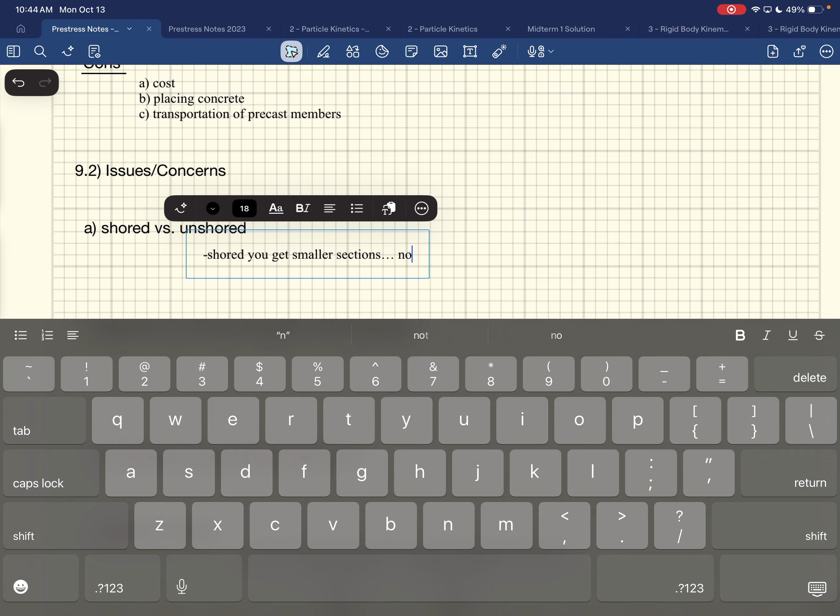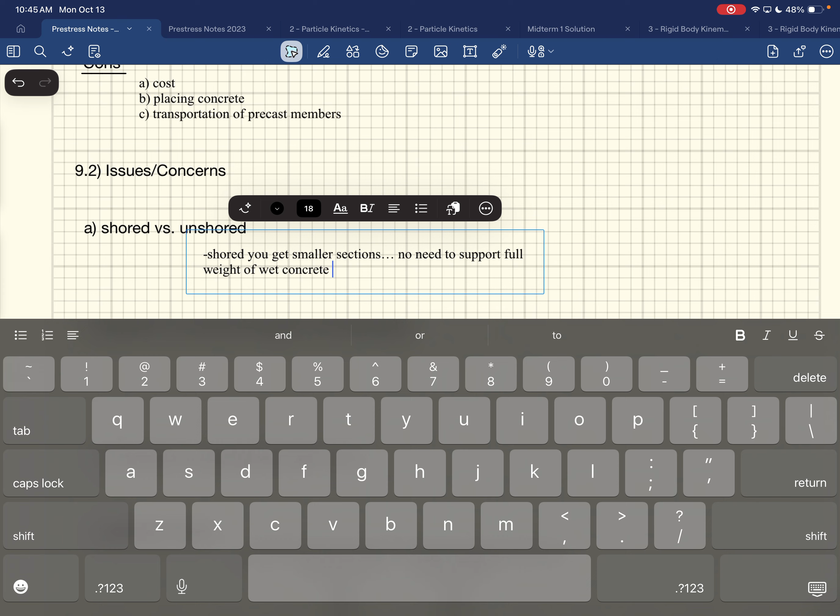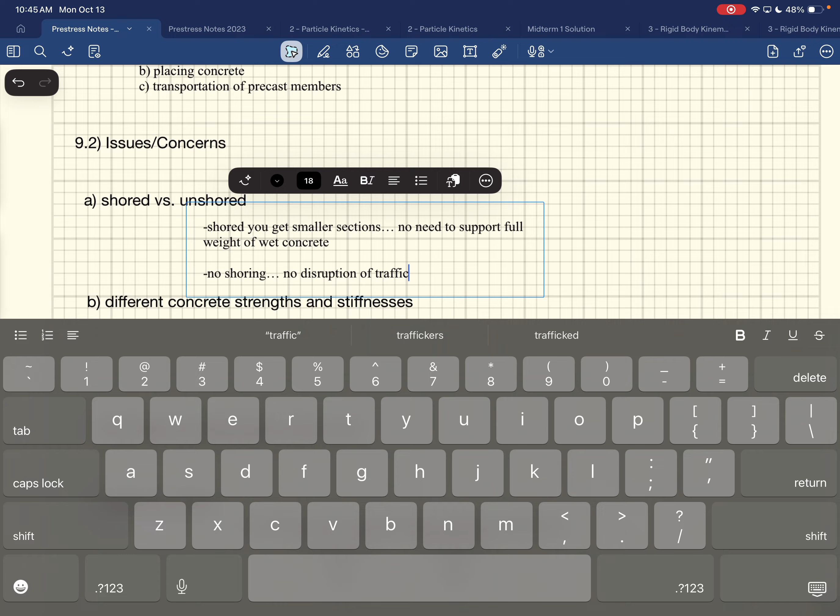Okay, issues and concerns: shored versus unshored. Shored, you get smaller sections - there's no need to support the full weight of wet concrete. With no shoring, you get no disruption of traffic below the bridge, but you end up with bigger sections because you have to support wet concrete.

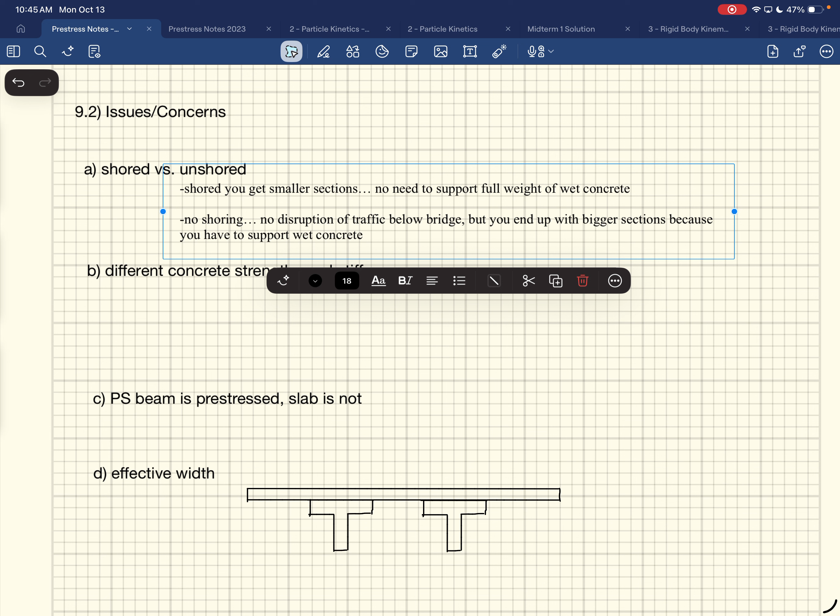Again, shoring just means: do you support the bridge mid-span, or someplace along the way, from underneath when you cast the concrete, and then remove the shoring? Or do you just have the pre-stressed members carry the full wet concrete as it goes across? So that's something you have to consider along the way.

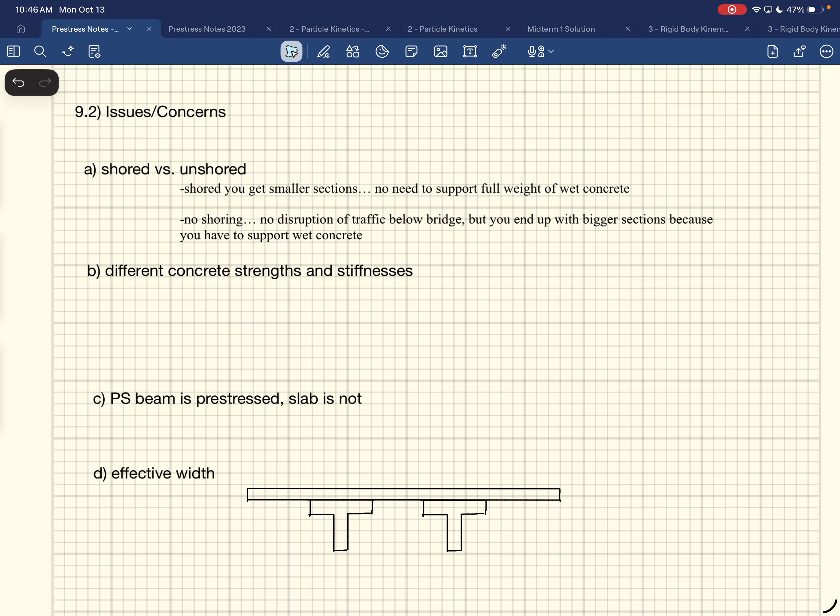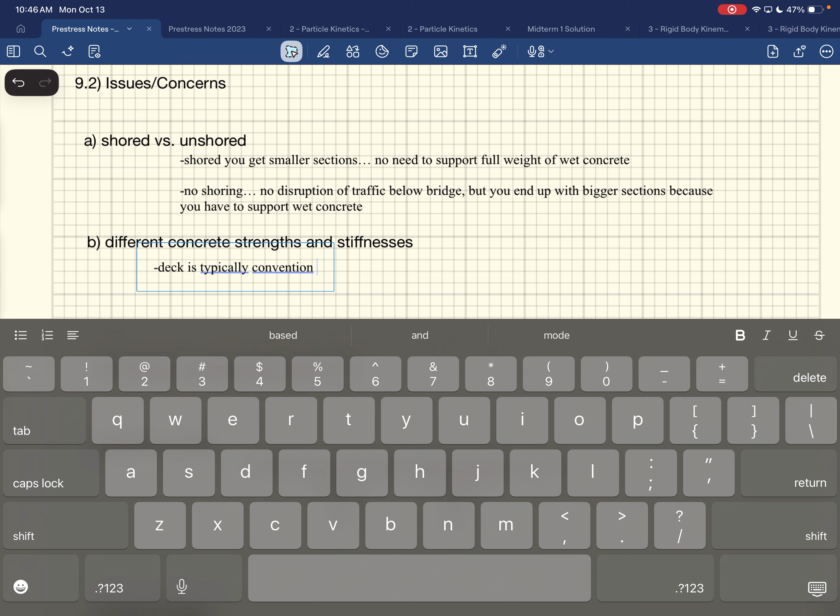The different concrete strengths and different stiffnesses - the deck is typically conventional concrete, around 4 KSI, somewhere in that range. The pre-stressed member uses at least 6 KSI.

Did Adam say what they usually get for their mix? 8,500 PSI? After, they try to get to 4,200 overnight. That's pretty cool. Well, they want 3,500, so they shoot higher. Last they checked, it was like 13,000. 13 KSI after 4 days? Yeah. Why? Because you can - this is why we do our own mix, so we can do that.

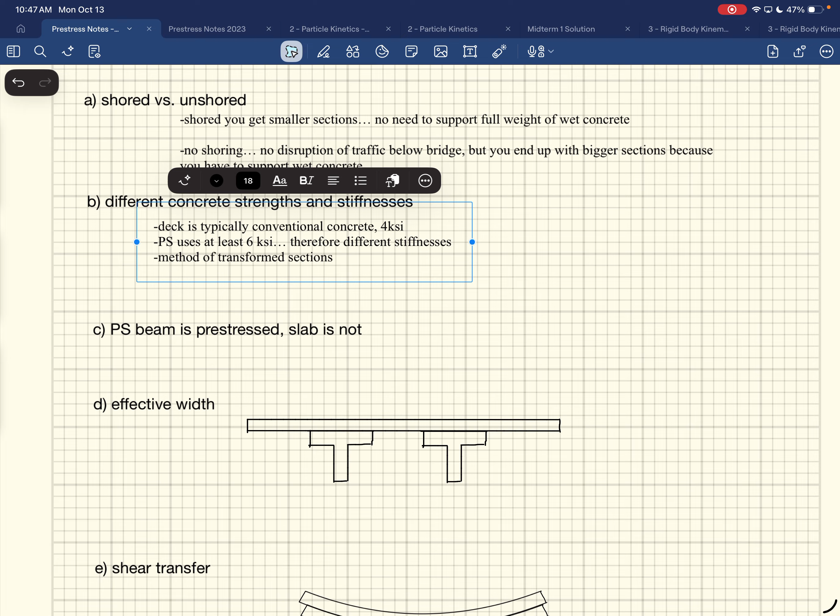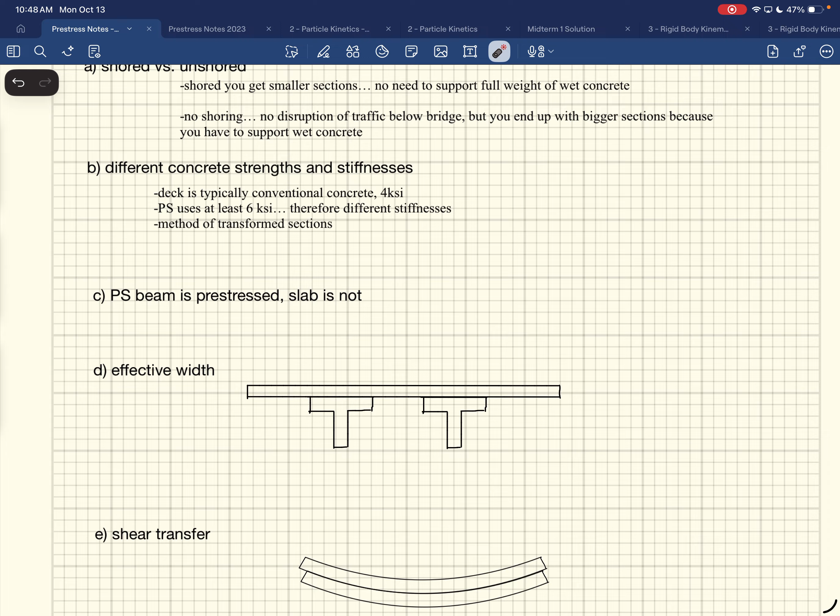Okay, we've got just 2 minutes here, so we'll leave it there for now, and then we'll do effective width - that deals with how much of the deck you can use as part of your composite section. Then the shear transfer, and we'll dive into the method of transformed sections, giving you a procedure for how to calculate it, and then you're on your way. So, cool, we're done.